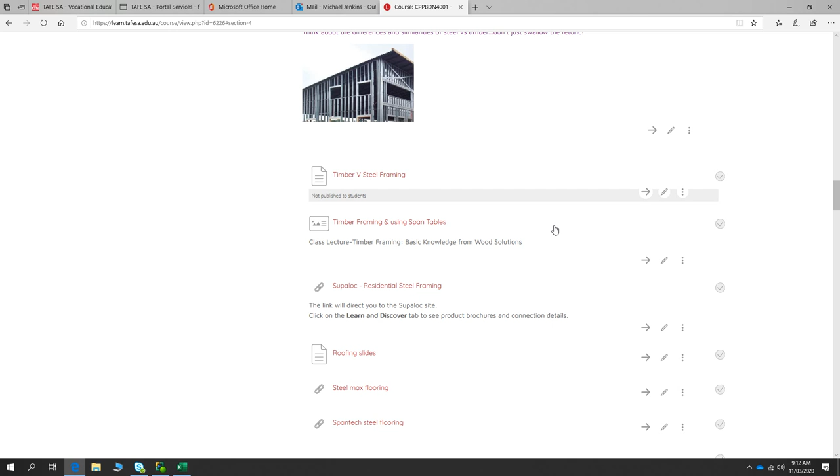So, we've been through timber and steel sufficiently, I think. What we haven't covered yet is termites. I'll see if we can weave a bit of that in toward the end of today's lesson, but the most important thing is to get going with concrete and footings and foundations. So we'll come back to termites a little bit later.

Concrete's one of those building materials that's been around for a long time, and it will continue to be used very broadly.

It's one of the cheapest building materials you can use. Typically it does make up a large part of your building cost, probably around 15-20% of your total build cost. But per volume it's actually quite cheap, around $200 to $300 a cubic metre, depending on where you are in the state and what strength of concrete you're ordering.

The thing with concrete is we typically tend to use it in very large volumes. But it's one of those materials that's been around for a very long time. For anybody who's travelled around Europe extensively, you'd see Roman ruins several thousand years old, still quite solid.

But the majority of use of concrete is in footings, and that's what we're looking at with today's presentation. For our research report, we're comparing suspended lightweight floor framing systems with doing a concrete slab on ground.

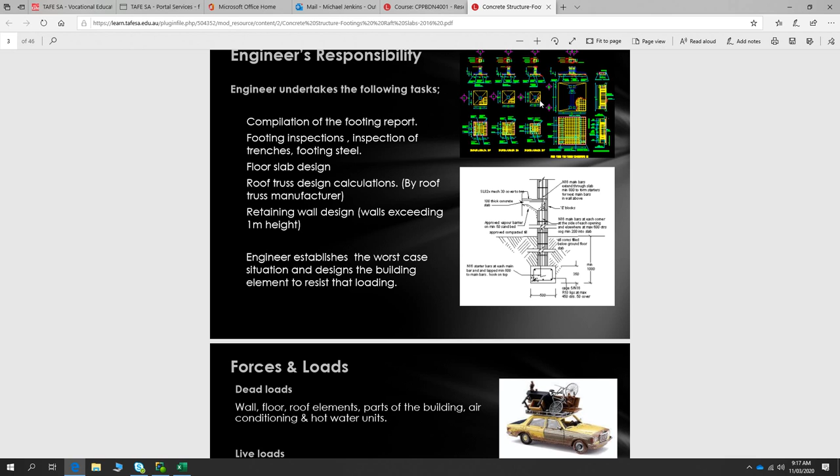Also, it's a very important thing typically to keep any retaining walls at less than a metre high, because if you go over a metre high, it requires engineering for the retaining walls. You're typically looking at a bill of around $1,500 for engineering for retaining walls, plus engineered retaining walls are typically quite expensive to build as well. So if you keep your retaining walls down low, you keep your costs down a lot with your retaining walls.

And typically the way an engineer works is to establish the worst case situation and design the building elements to resist that loading.

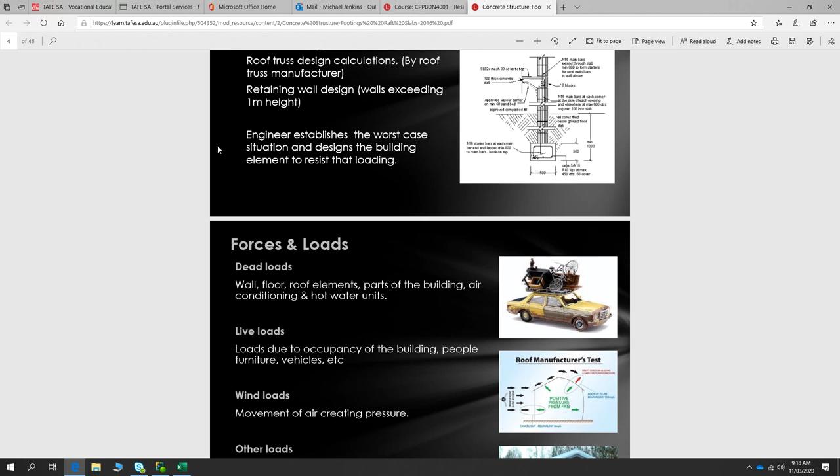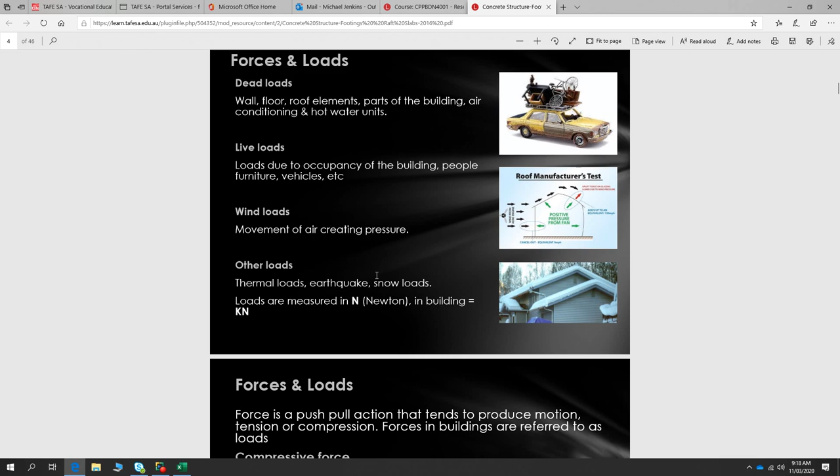There's a whole lot of loads that an engineer has to consider on a building. First, dead loads, which is simply the weight of the building - everything that makes up that building fabric and isn't going to move. That also includes things like hot water services and air conditioners, which impose a fair bit of weight but aren't taken in and out. They also have to design for live loads, considering the weight of people moving into a room, grand pianos, that sort of thing. Then wind loads - the horizontal forces of wind and also the suction created on top of the building as it moves over. And then earthquake or snow loads in certain areas.

We don't have to design for that. In South Australia, no snow and fairly stable conditions.

We covered this to a small extent last week, but we'll talk about it a little bit more. So, force is a push-pull action. Two major ways of looking at the forces impacting predominantly on building elements are compression and tension, and you can see that in buildings everywhere, in just about any element of a building.

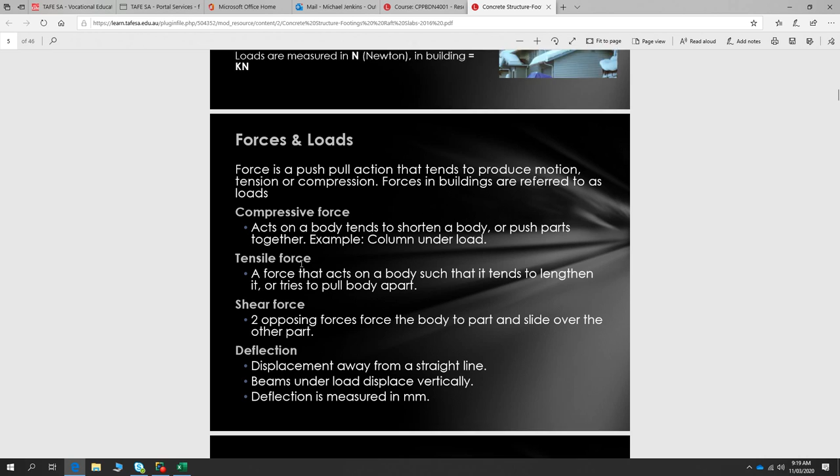Look at that and see what aspects are in compression and what sections are in tension. With that compression and tension, typically if we want to make, say, a joist - something that spans from distance to distance - if we want to get something to span a long distance, the important thing is to make that element deep, because that means the amount of compression and tension resisted is further out, right at the centre here.

Our compression and our tension are neutral right in the centre of the beam. The further we get our material away from that neutral point, and the more material we have at those points, the more compression and tension it resists.

If I get, say, this plank like this, and lay it across two points of support, if I stand on that or jump on it, I might be able to snap it. But if I turn it up this way and retain it at the ends to stop it from rolling, I'll have a really hard time snapping it, because it's deeper in this section than it is through that section.

There are also shear forces happening, which occur where we have two forces acting against each other in very close proximity, with very little eccentricity. If we've got a force happening down and a force happening up, say separated by a metre or so, there's a lot of eccentricity in that - those forces are a long way apart and they'll tend to rotate something. But if the force down and force up are happening very close to each other, then they tend to shear materials.

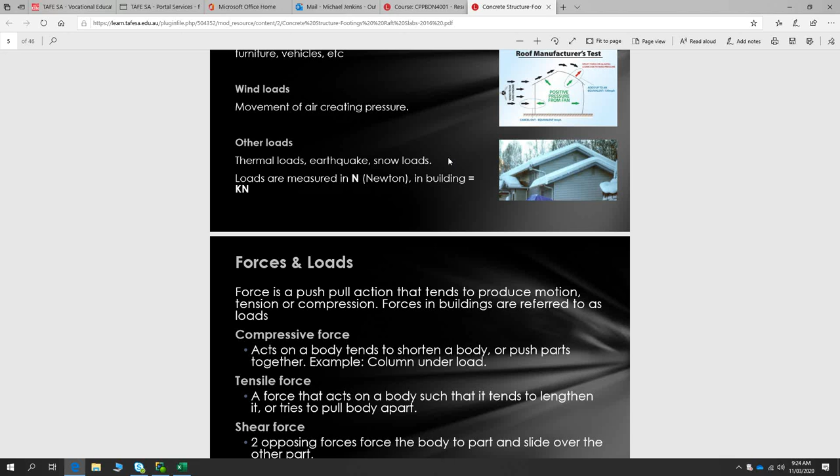No, it's like - foundation might be just the soil, the natural soil that's there, or the compactable rubble or something that we bring in to the site. It's whatever we end up building on top of. So is that what we compact down? Yes. Foundation? No, so we do the footings off that.

I'm sort of hammering this definition a bit, because quite often you watch renovation shows on TV, and that terminology gets mixed up all the time between foundations and footings. They'll say, oh, the foundations are cracking, when it's actually the footings that are cracking because the foundations are moving. So foundation is the rock or soil in its natural state on a building site, or actually, natural or improved state. It's what we end up building on top of.

The footing is the lowest element of the structure in contact with the ground, and it distributes the total load of the building. Typically it's going to be concrete. You can do footings from other things - you can drive steel pylons into the ground, you can drive Permapine posts into the ground - but typically it's going to be your concrete.

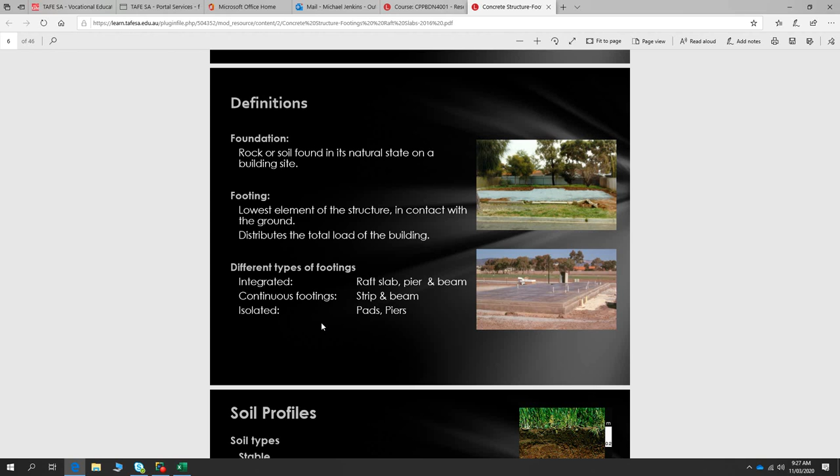So I mentioned before, one of the first steps we do is get soil samples done. Typically your larger engineering firms will have an in-house soil sampling department. So the engineers that I use, they also own a soil sampling business as well, so it's all the one package, and they can rely on those soil samples.

But you don't always have to go with that. You can have independent soil samplers come out and do your assessment. You might even want to get this if you're looking at buying land, or advising people to buy land - you may want to get those soil samples done initially. Typically it costs around the $500 mark to get those soil samples done, which may be a very worthwhile investment because there can be, even for a small house, about $20,000 difference between clay soil or reasonably stable loam. So that $500 can be money well spent in some scenarios.

So the different types of soils we end up looking at: we've got stable soils, which exhibit little movement and provide a very stable base, and reactive soils that react with moisture - they swell as moisture content increases and shrink as it dries out.

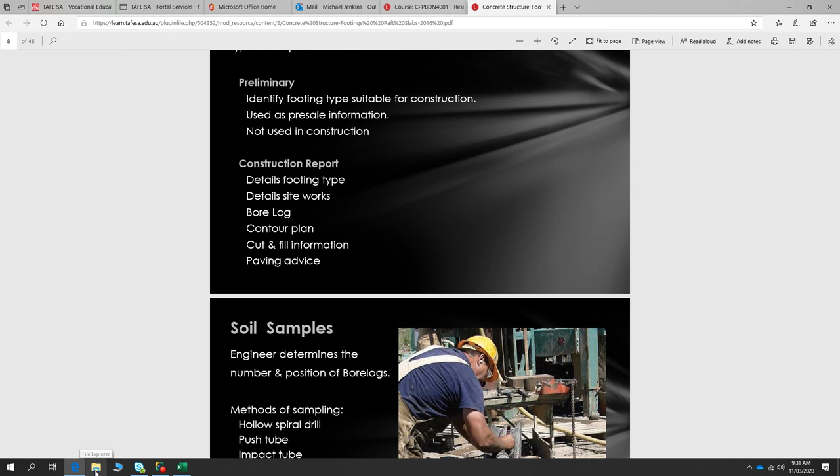Typically it's 3 bore logs. But you may need to get more, or you may be allowed to get away with less. So you're allowed to do less when you're working on a larger subdivision and the bore logs are very uniform across those samples. So when you've got a lot of uniformity across, then you're allowed to reduce it to one bore log, one soil sample per allotment. But typically it's going to be 3 on the allotment.

No, I don't. No, actually, yeah. I was going to see if I've got a complete engineering report for footings that we can just have a really quick look at, because it's an interesting thing to have a look at.

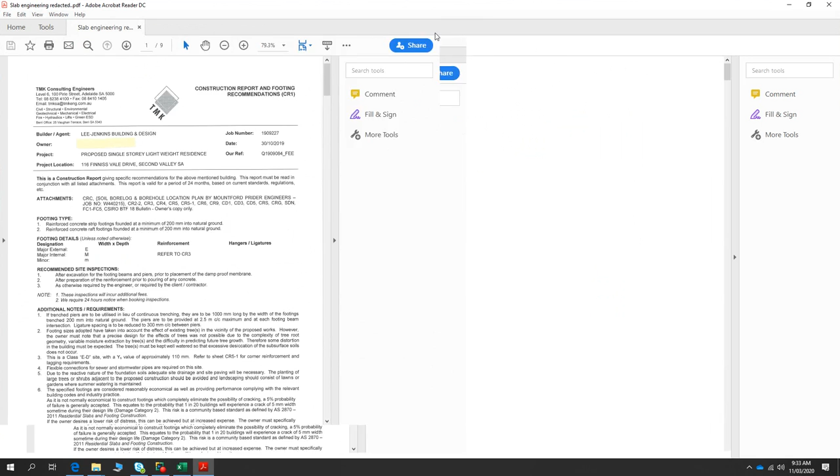So what have we got? Yeah. This is not an entire one.

So what have we got to look at here? So this is a bore log, showing the boreholes and the depth of those boreholes and the depth of the horizons of soil that it goes through. And we've got some bore logs here in the slides, so I won't spend too much time looking at those. That's typically your footing plan that will come through.

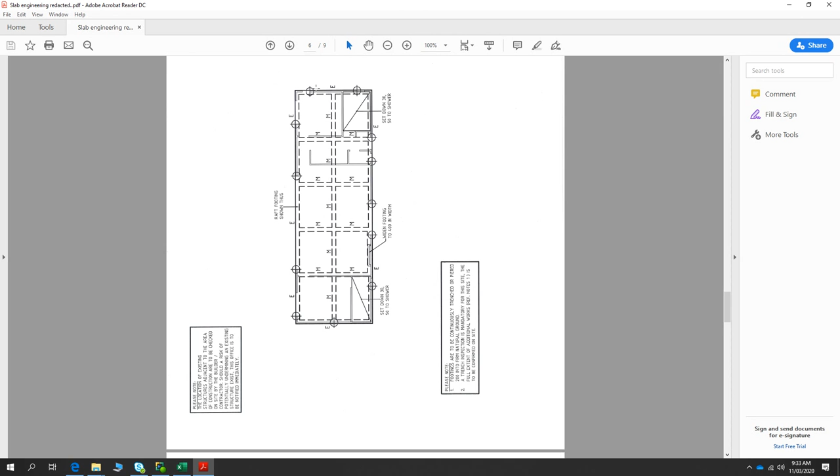I'll rotate. Right. So that details where your footing beams are going to go, and then the slab above that.

And on this page is where the majority of your information comes. So we've got an E next to all these beams. That denotes them as an external beam. And then we have a look on the table here. That external beam is going to be 300 wide by 1150 deep, which is a very deep footing.

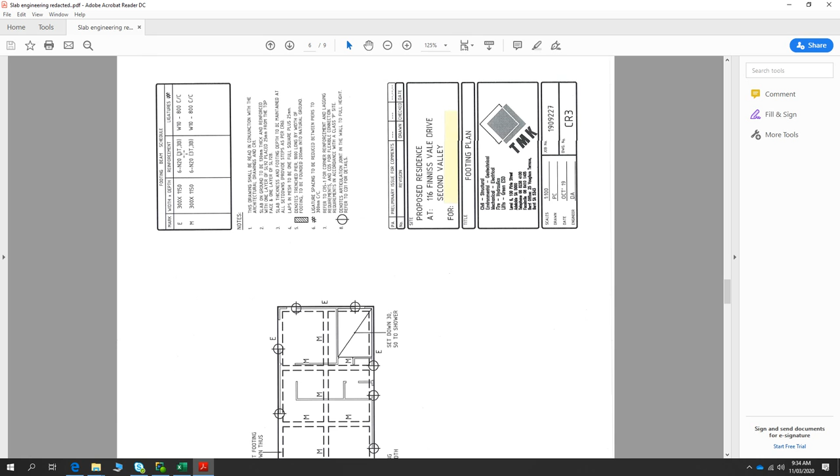And then once we get really deep like that, we have to put a lot of steel in there. So this one's got 6 N20 bars, 3 top and 3 bottom in our beam. And that'll make a bit more sense as we move through. And then this denotes our ligatures, so I'll talk about those reinforcing cages. Typically this page gives you pretty much all the information you need in regards to construction of those footings.

So that's the page that will go to your excavator driver, the people doing the site works and the steel fixing, and also to the concreter. And I've just taken little bits out of an engineering report to summarise it for this, so I don't have the full report here with me.

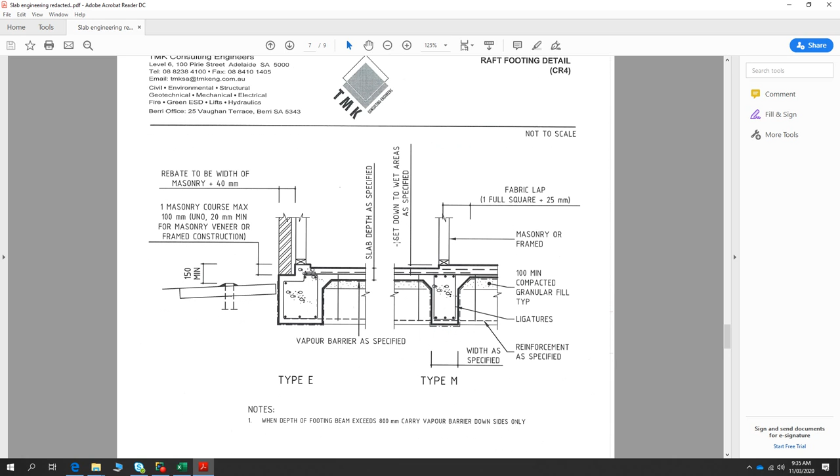But typically, your report's going to be around 30 pages or so, and it's going to include a whole lot of details in regards to how you deal with certain aspects. So you've got some paving advice here and the height of paving and slope of paving away from the building. You've got advice on how you deal with set downs with your reinforcing and your ligatures, where to be placing your internal steelwork, so your slab mesh, and then where to be placing vapor barrier and compacted fill.

It tells us here 100 millimeters minimum compacted granular fill underneath that. So you typically have all of this information within your engineering report. This is detailing to what extent you can excavate next to a footing beam, so to what depth.

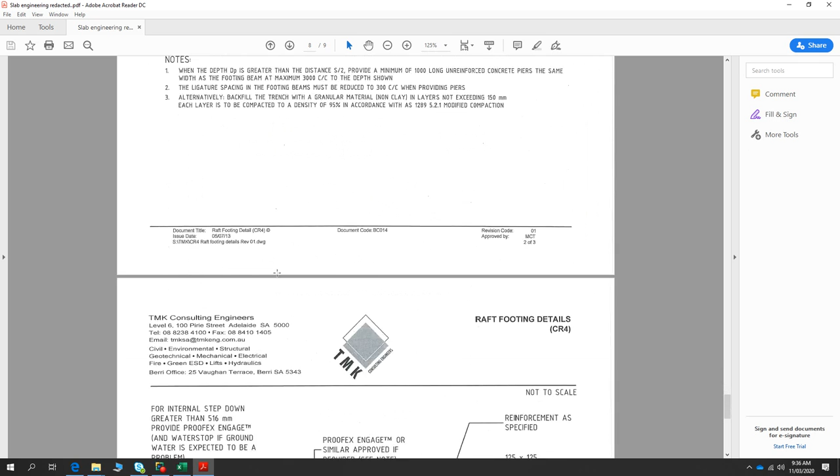That one gives how much lap you have to have of your slab mesh within any set downs. That's an important detail for determining how much slab mesh you need, and also what you have to do with the excavation. When you're excavating on site, you have to cut this soil away deeper.

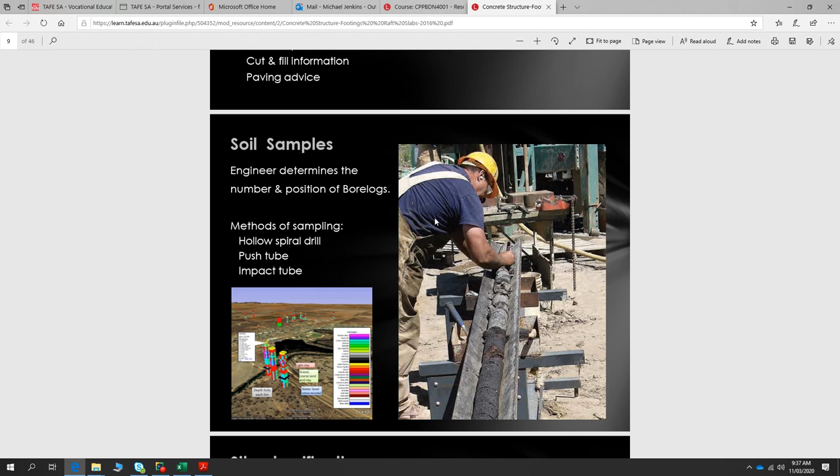So that's some little snippets out of an engineering report. The reason engineers include things like paving advice around your footings is because that impacts the amount of moisture gathering around your footings. If we've got soils that swell or contract with a lot of moisture, we want to reduce the amount of moisture or rain that soaks into the ground near our footings. So we need 50 millimetres of fall for the first metre of paving to ensure the water moves away from the site.

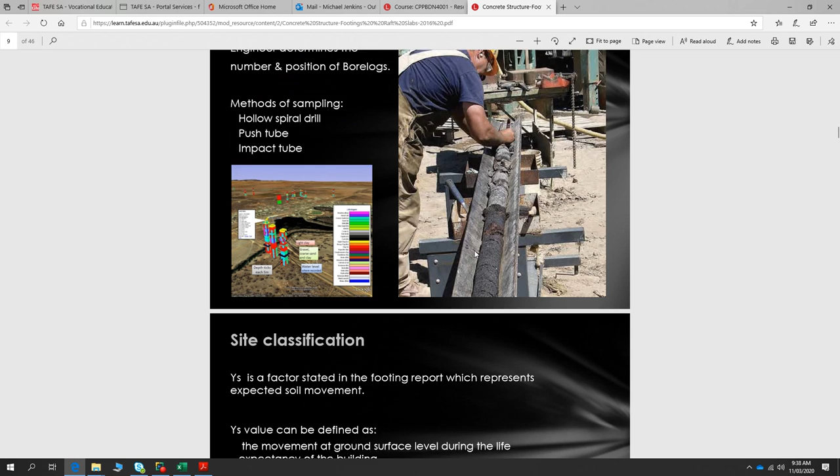The main thing we get from our soil samples is the classification of the site, and we get our Y value. Do I still have that? I think on this engineering report, right at the start, we had a Y value of approximately — this class ED site with Y values approximately 110 millimetres.

Now that's really quite extreme. That's why those footing beams are 1150 deep, because we can expect 110 millimetres absolute maximum movement between when the soil is completely dry and when it swells with moisture. So 110 millimetres, that's a bit taller than this marker pen — that's probably about 90 mil. So yeah, 110 millimetres of movement. That's how much that building could potentially move on the site, up and down.

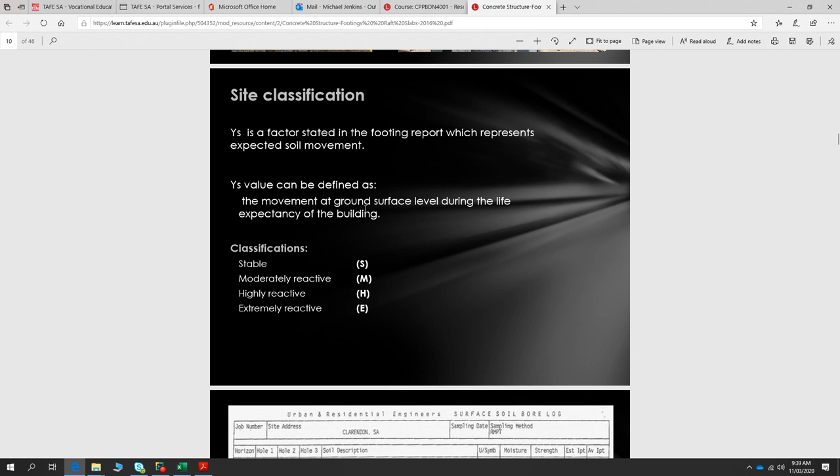That Y value is defined as the movement at ground surface level during the life expectancy of the building. So our extremely reactive classification is when you've got Y values over 100. Highly reactive is Y values over 70. Moderately reactive is between 20 and 70, and stable is below that.

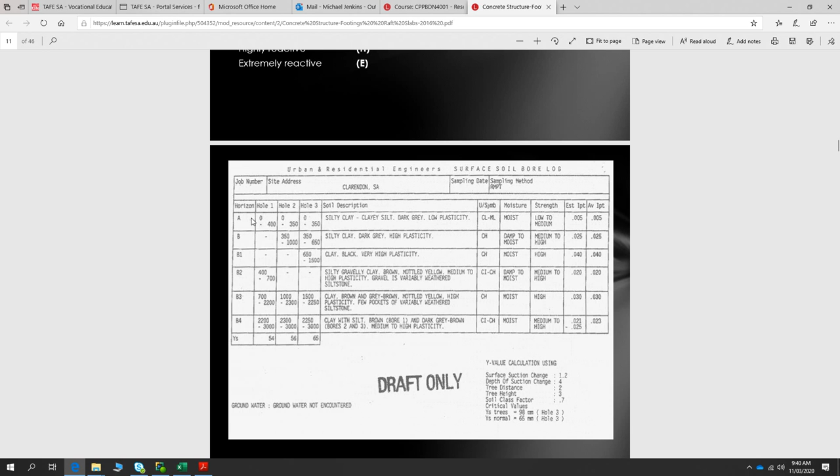I showed you that bore log quickly earlier on, tilted on its side — this one's a bit friendlier to read. What we can see in this bore log is that we've got 3 boreholes which were done: borehole 1, borehole 2, borehole 3, and that should always be read in conjunction with a site plan. That site plan shows where borehole 1, 2, and 3 were located, because that helps us build up the picture.

So we've got 3 boreholes done there, and we can see the total depth of those 3 boreholes by looking right down at the base of the table — they are all 3 metres deep. So they went straight to 3 metres. A borehole will not always go entirely to 3 metres, and sometimes engineers will specify deeper boreholes.

In our office, I think we typically went to 4 metre boreholes, because what we have in South Australia are called deep-seated clays, meaning we've got clay to quite a depth, and you can get small amounts of movement even at 4 metres deep, because you've got moisture percolating through to that depth. So in certain situations you can have impacts on the top of your soil happening from about 4 metres down. The minimum you have to go to is 3 metres, but sometimes engineers want those taken to 4 metres or so. At other times you hit rock, and when you hit rock, you can't go any further with a push tube. So that's the end of it, and that's what's called refusal.

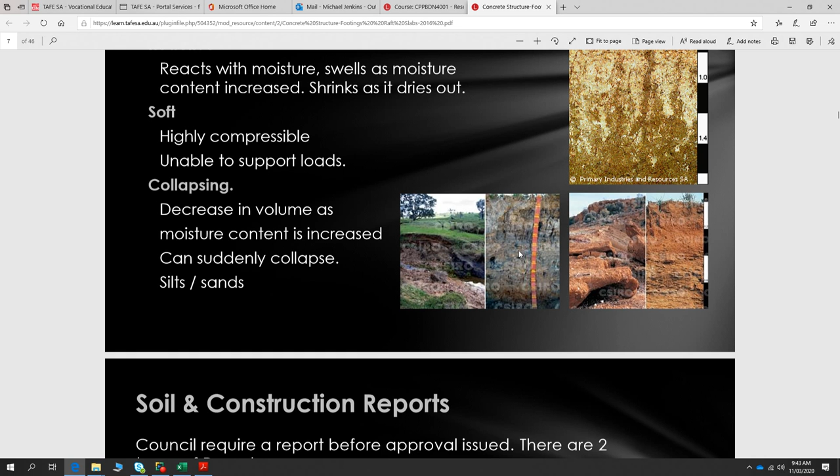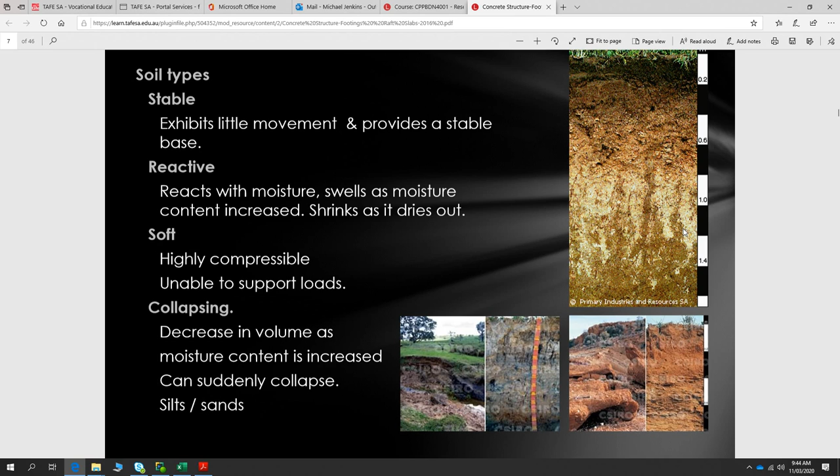In this soil here, we can see we've got the humus layer right at the top. For the first 250 mil or so we've got humus, then a loam - a fairly nice, friable loam with a bit of weathered rock in there. Underneath that, it looks to be a white clay with weathered rock fragments going into a brown clay underneath that. So we've got our different horizons here - one up here, another there, another about there, another approximately there - and that's what gets reflected in our bore logs.

So we can see those different horizons of soil, and it's determined by the soil sampler or the engineer inspecting how much movement we can expect from drying to saturation of that soil. Sandy soils won't move very much at all with drying to saturation, whereas clay soils will move a lot, and it's that percentage of clay within the soil that will determine how much movement.

The other important thing to note from our soil samples is not only expected movement at surface level, but how much strength that soil has as well. Some soils don't have a lot of bearing capacity - I can't remember what the cutoff is.

In AS2870, the Australian standard for residential slab footings, I think it's about 110 kPa or so bearing capacity your soil has to have - that's a moderately loamy, clayey sort of soil. Some soils won't have that bearing capacity and need to be improved by bringing in compactable rubble, etc. But that's the other aspect your engineer is going to be looking at - the bearing capacity of the soil, how much weight it can take before pushing out of the way.

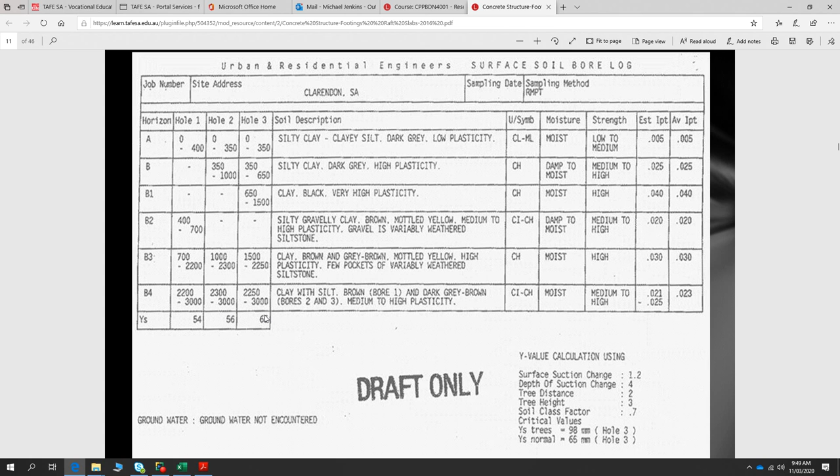It also depends on what sort of weight is going on there, but there's a lot of uniformity in those Y values. If I had a Y value of 54, 56, and then 20, that would probably be just as, if not more, concerning, because then we can see there's the potential for a lot of movement in one area but little potential for movement in another area, if that Y value is extremely low. So it's not just the total number you're looking at, but also the difference between the two.

So that raft slab helps carry the building no matter what the soil is doing.

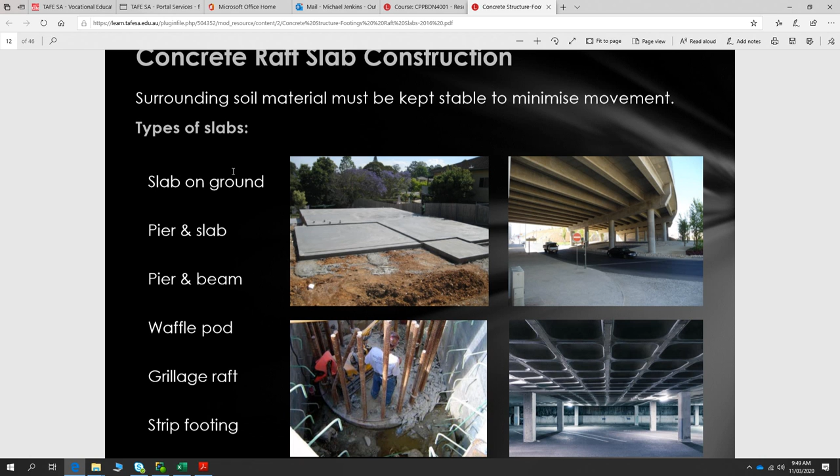Beyond that, if we've got quite problematic soil, like in places around toward Port Adelaide, from Bowden, Brompton area through to Port Adelaide, there were clay pits dug out for manufacturing bricks. Those pits have been filled in with all sorts of stuff—car bodies, whatever. Those are particularly problematic sites to build on, because all the stuff chucked in there gets compressible over time. So if you're going to do a footing on top of that, you want to bypass all of that junk and get into solid ground underneath.

One way of getting into solid ground underneath is to auger piers. You get a large auger. Did anybody see any of the work going on around here? I don't think there's any augers happening around here, but when all this Southern Expressway bypass stuff was being built, there were really big machines called continuous flight auger, a CFA, maybe 20 metres high or so, augering piers down into the ground.

Anyhow, that's typically what you do. You have a really long auger that takes out a tube of soil, and then you make up a reinforcing cage that goes down in there, and that gets filled with concrete to make a concrete pier going all the way down to lock into stable soil underneath. So that's how you bypass all the junk deposited on top. It's like a big drill—a giant drill for the earth.

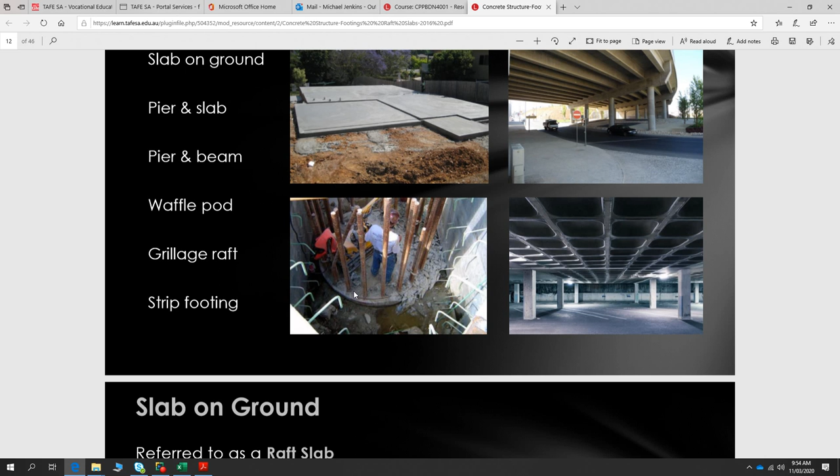With your typical raft slab, to do a cross section through that, as we saw on that engineering report - I'll scroll down to detail - we see that the reinforcing is placed inside those footing beams with 3 bars on the top, 3 bars on the bottom, and ligatures that hold them into a cage.

I don't have a cross-section through a grillage raft here, but a grillage raft instead will have - these are 20 mil bars for this project, but a grillage raft might have 32 mil bars, so really fat bars, but only have 1 at the top and 1 at the bottom. So it makes it so much simpler for placing that steel and fixing it, because you just have 1 bar and then a hanger from that, and then you have your other bar dropped in the bottom of that. So the steel fixing for a grillage raft is really quick and simple.

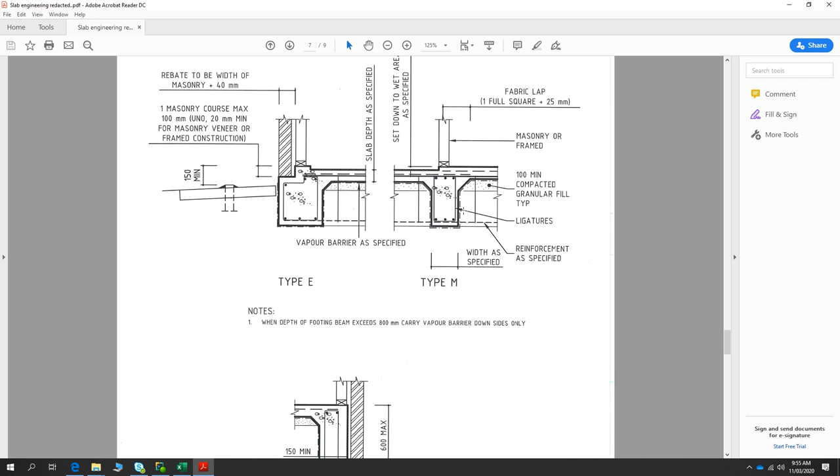And so a lot of your volume builders prefer to use that system. The downfall of using a grillage raft is that you don't get quite as much even distribution of forces through your footing. So you probably don't want to do that if you're going to have an exposed concrete surface, or if you're doing a polished concrete surface, because there's more likelihood of cracking happening in your slab.

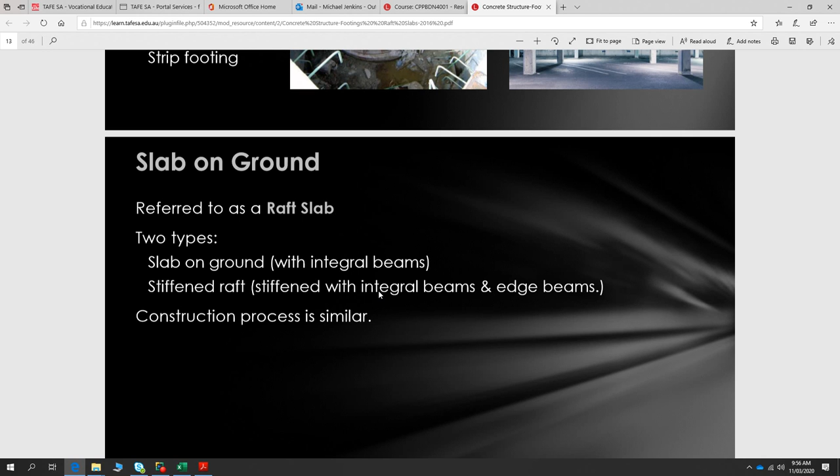So a bit of cracking is not always an issue. The Australian standard for slabs and footings allows 5mm cracks, which I think is really quite extreme. But there is some allowance for cracking in concrete, and cracking is almost unavoidable. But there are some things you can do to minimise that, and one of those ways is the traditional raft slab as opposed to the grillage raft.

Beyond the grillage raft, there's also strip footings. If anybody's lived in an old cottage in the eastern areas of Adelaide, sort of the Unley Parkside region, you'll notice there's a lot of cracking that happens in those buildings. It's not because the soil there is bad, it's not as bad as it is in Keswick or Newton or Rostrevor. The reason those buildings crack a lot is because they were built before the invention of the raft slab, and they typically had strip footings underneath, which aren't strong enough to resist the forces in our soil around Adelaide.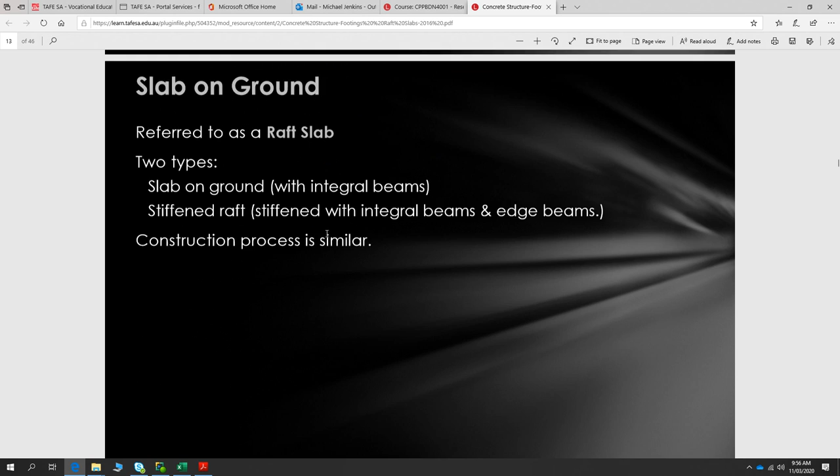So I'll go through the construction process for our raft slab, and then progress through the others fairly quickly. For the stiffened raft, the first thing you do is clear the site. Typically you're going to be removing 150 millimeters of topsoil, but you never really know what you've got under the ground until you start digging it away.

At the place where we're building at the moment, I thought the topsoil typically was going to be around 300 mil, and we'd be removing 300 mil. In places, we removed up to about 800 mil before we stopped getting black humusy soil out, and it was in dips etc. So I guess that was a fairly good case scenario, because there was lots of fantastic topsoil and very little rubbish soil to get rid of. But you never really know until you start excavating.

Typically it's only going to be around that 150 millimeter layer that has humus in it. So humus, that's all your broken down grass and leaves, all the organic matter. The reason you want to remove that is because it's quite compressible. If you leave that on the ground and put a building on top of it, it squashes down and can't bear load.

You want to take that away and put it up the back of the block, or wherever you're going to be doing garden beds, because it's fantastic stuff for growing and takes thousands of years to produce.

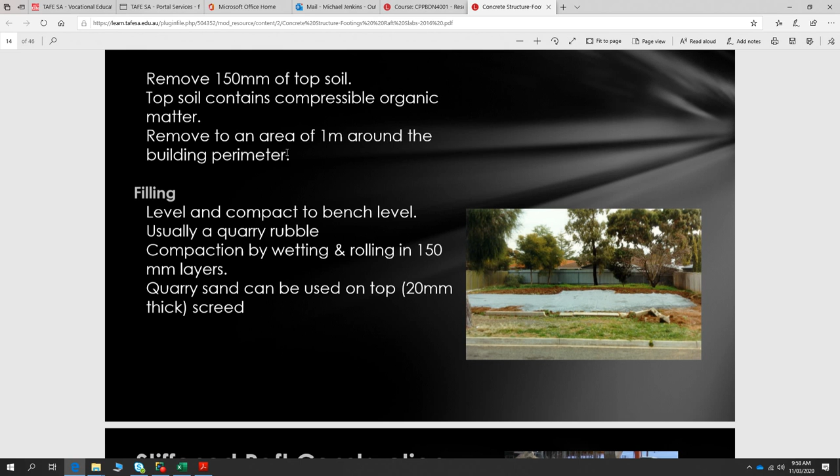So you take away that top layer of soil, and you do that to a metre around where you're going to be working. Typically, you want to give yourself about a metre of flat section around your slab, because you're going to be doing paving, etc. It's so much easier to excavate and cut things flat when you've got a vacant site than when you've got a slab in the way.

Then you'll typically bring in about 100 millimetres depth of compactable fill and create that building pad to a metre past where your footing beams' edge is going to be. Then you compact it and roll it in, in maximum 150 mil layers. So if there are areas where you have to build it up a lot more, you lay it in maximum 150, wet it, and compact it.

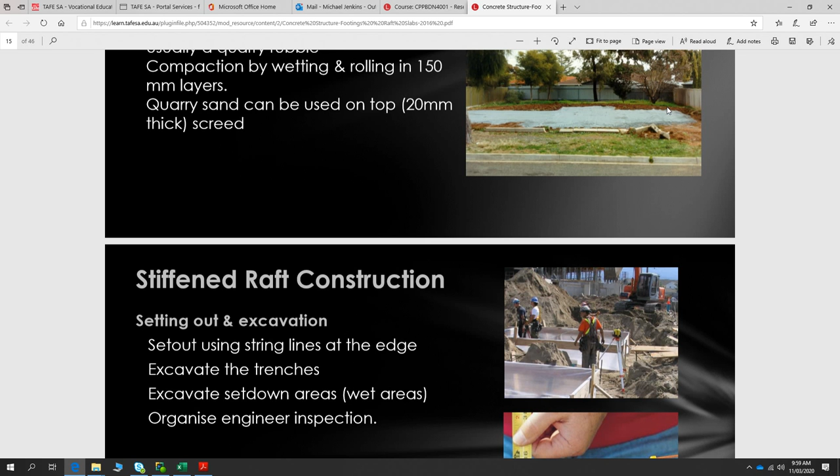Once you've got that flat site - and that's a fairly messy looking one, I'd probably like it to be a bit smoother than that before you start marking out - once it's all screeded off, really nice and flat... bear in mind, the flatter and smoother you get it, the less concrete you use. When you're going to have a concrete bill of around $20,000 or so, 10% extra can be a fair bit of money. So it's worth the time getting your bench really nice and flat.

So that's an extremely good example. You typically won't get footing beams cut in that nicely, but that shows the 100 millimetres of compactable rubble on top, or quarry sand, and then a 45 degree cutaway for the edge as well. That helps give the interaction between your footing beams and your slab extra strength right in that corner.

Breakaways like this are pretty much always going to happen, so that's a really good example. You'll very rarely see footing excavation as neat as that - that's typically more what you want to see. Well, that's on the rough side of things, I think.

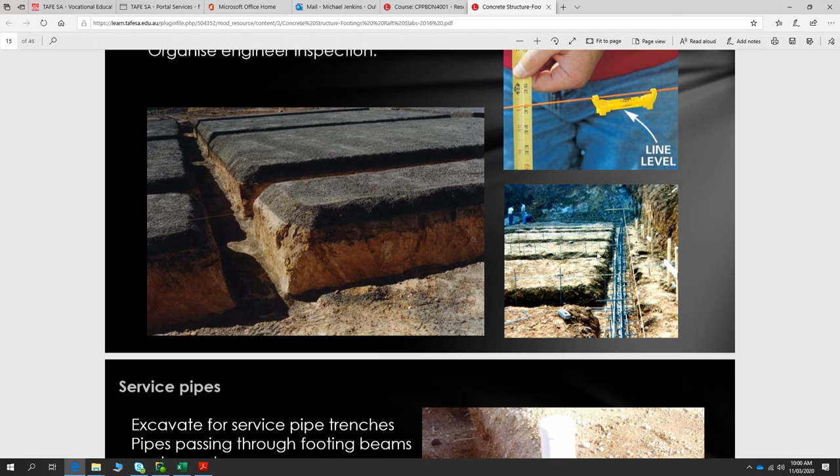Anyhow, so you've benched your site, and then you set out string lines. I think I mentioned last week the 3-4-5 triangle. Does everybody remember the 3-4-5 triangle? Yeah, so that's how you do it.

So you work out definitively where one side of the building is going to go. You measure that off the boundary from your site plan, get that one string line in place, and then set out all your other string lines from that using the 3-4-5 triangle. Then do the check method corner to corner, and if they all match up, that's it. So once again, it's incredibly important to spend time on that process, or have your builders and concreters spend time on it, to get it perfect.

Yes, so concrete will end up going on top of this. So basically that soil or that foundation ends up being the formwork for the concrete to go over top of. If, for example, we didn't cut in footing beams like this and just did a flat slab, that slab wouldn't have the strength to resist forces picking it up from side to side.

As I expressed before, the greater the depth we give something, the more strength we give it. So if we have a slab and we excavate for beams like that and then fill those full of concrete, that gives our slab a great deal more strength to resist forces of heave and subsidence.

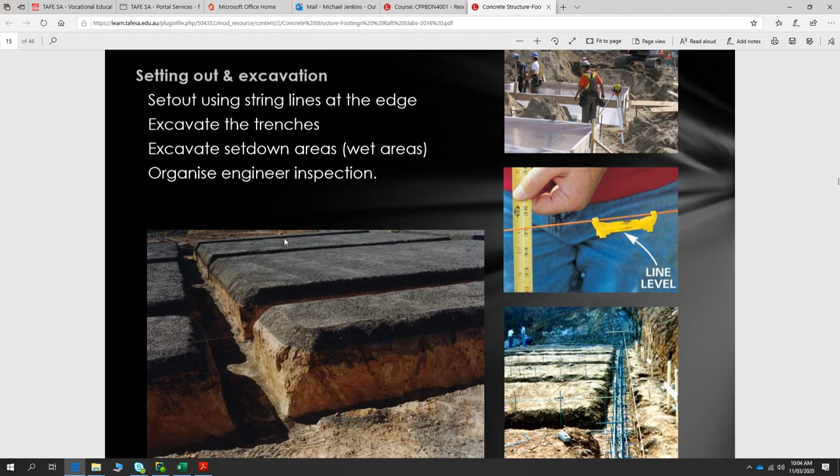Once that excavation is going well, before it's finished, you'll probably get onto your engineer and email the inspections department to book in an inspection for tomorrow morning or evening. Then the engineer will come out and inspect at this stage, measuring the depth and width of trenches, telling you to clean them out, etc., and then give their report and the go ahead for fixing the steel.

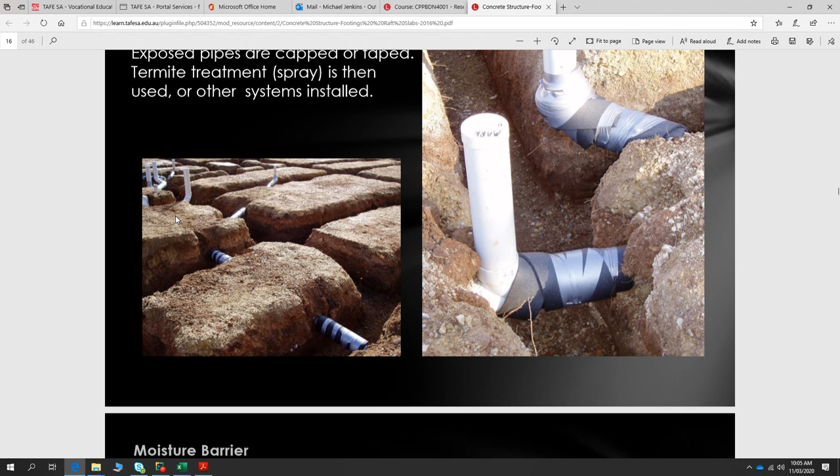Whilst you're waiting for your engineer to arrive, you get your first fix plumbing in. So before putting any of the steel work in, you want to put all your pipes in and then backfill over where those pipes are. That's a fairly rough job there. I think that would have been fairly clayish soil because you've got your beams really close together - would have been a very difficult one to excavate for, and with all that footing and plumbing in there, fairly difficult one to do.

Anyhow, what you'll notice on this first fix plumbing is that there's this spongy rubber taped around all of those pipes. Wherever you have pipes which go through a footing beam, you need to put a layer of that lagging around it. If it's moderately reactive soil, you do one layer of lagging. If it's highly reactive or extremely reactive, you do two layers of lagging around it.

That's basically the shock absorber for when soil moves, different to footings. Because if we've got soil that's getting saturated and it's expanding, typically that's going to push past the footing beams. It'll try to lift the footings up a little bit, but because there's a lot of weight, it'll push past them and try to lift the plumbing up as it goes. Therefore, if we do lagging around the pipes, that allows some movement in there because we don't have concrete around the pipe. But it's things like this that are very important to look out for.

So what's happened here is the plumber has lagged all of that, and that's all been lagged correctly. But as soon as you go putting concrete in here, concrete is going to bind around that pipe there, that section there, and that's not lagged. So what I'd like to see is that lagging carried around that and packed out, or possibly you get a piece of ply in there and pack soil again, to make sure you don't get concrete binding around your pipes. Because as soon as you get concrete binding around your pipes, the rest of that lagging is pretty much useless.

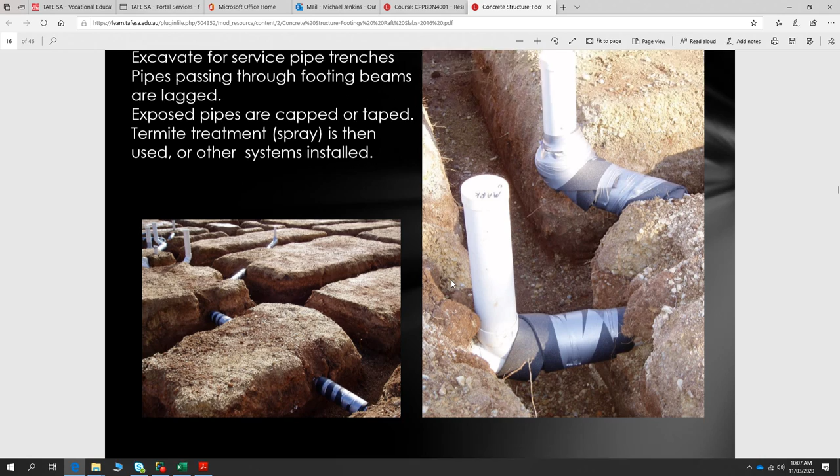So yeah, just those small details can be very important. If that's on the inside of your slab, typically that's going to be less problematic than if it's on the outside of your slab, because you get more differential movement on the outside. But because I've got pipes coming out here, I imagine that this may be the external one. Anyhow, it's those details to look out for.

Following that, for all residential slabs you have to have plastic underneath to stop moisture ingress through the slab. So that 0.2 mil polythene layer gets put down, and that's a fairly important bit to get right as well. You want that done very neatly, and you want adequate plastic in those trenches, of course. So plastic goes down, and then the steel fixing happens for all of your beams in between.

So what we can see there is we've got 3 bars at the top, and then we'll have 3 bars at the bottom of that beam as well. Those ones are probably like 18 mil bars or so. What you want to see is all of those bars lapping correctly. You want them coming right to the corner. If you don't have bars which come all the way to the corner, then that's a very vulnerable position for that to crack and open up when stresses are placed on that. So those bars end up being held together in big cages made up by these ligatures.

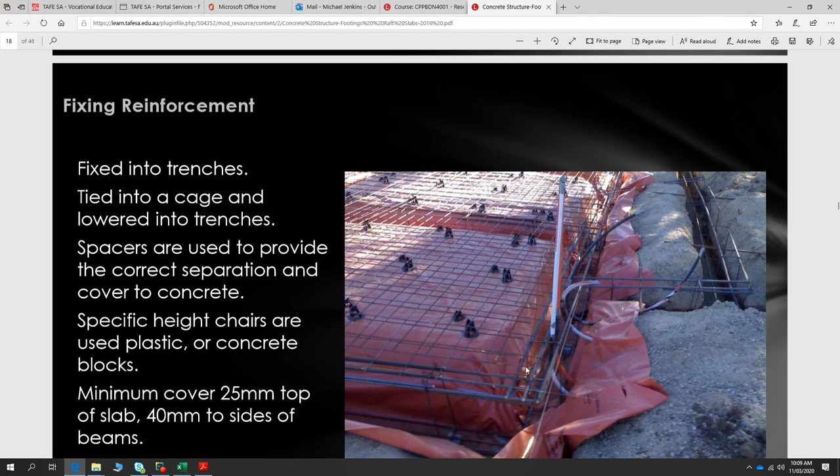So typically the way it happens is those large cages are made up next to the slab and then carried in and dropped in. When you've got plumbing penetrating through, you have to lay the bars down underneath, tie your ligatures, have them sitting up and tie it up high, then tie your bars in there and drop them down. After that's all in place, you put out all the slab mesh.

So these bars here resist a lot of your forces of heave and subsidence, whereas this slab mesh helps control cracking in your slab surface.

If you've got some soft fill underneath, or more than 300 millimeters of uncontrolled fill, then you need to do 2 layers of mesh. So 1 layer of SL72, 1 layer of SL92.

With your mesh, that's just for square mesh, and SL72 is 7 mil bars at 200 centers. Can anybody think what SL92 would be? SL82 is 8 mil bars at 200 centers. Oh, 9 mil bars at 200 centers. So there's actually a fair bit of steel that goes into SL92, and then also you've got mesh, which is 10 mil bars at 100 mil centers, so if you're doing a wind farm or something like that.

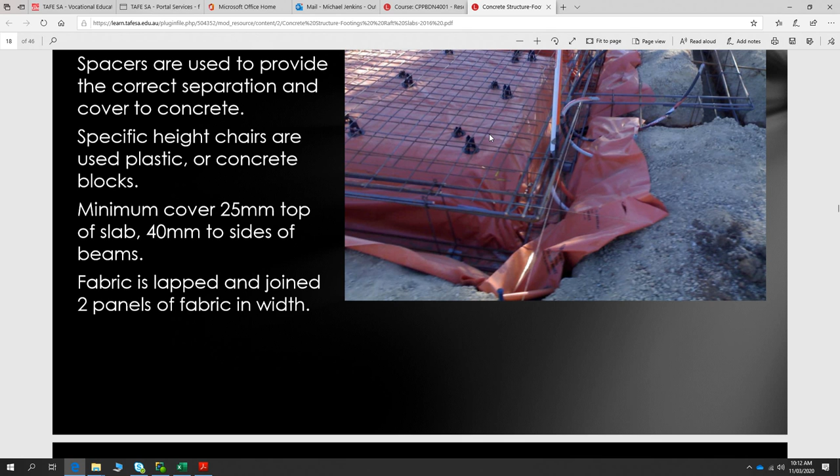I don't know what went wrong with the construction of this. Some bits in here, but that's important to minimise, because if you don't have adequate concrete coverage, that steel will rust, and as it rusts, it expands and pushes concrete away from the steel work, which means it rusts even more, which means it expands more and pops concrete away. So 25 millimeters to the inside of buildings, to any protected surface, and then 40 millimeters to the sides and bottoms of your beams.

At this point in time, you also have to think about termite protection as well. So while you're waiting for your engineer to come out and inspect the steelwork, you can get like Termimesh, or cordon, in to install small sections around all of your pipes. Your concrete slab is considered to be an effective deterrent against termites because they can't get through that slab. But because concrete shrinks as it's going off, it shrinks away from pipes and leaves a gap next to those pipes, so you get - this is an example of Termimesh.

Termimesh are an Adelaide company. They'll come and put a stainless steel skirt around all of your plumbing penetrations, so that when that concrete shrinks away from that, it doesn't leave a gap that termites can come in through.

So cordon do basically the same thing. Cordon barrier looks a lot like your orange plastic, but what it is, it's orange plastic with termite poison, like a layer of termite poison, then another layer of orange plastic again. So it's this termite poison sandwich, and that gets put around your pipes as well, so that once again, when termites try to eat their way through it, they get poisoned. So that's a chemical-free way, and cordon uses chemicals.

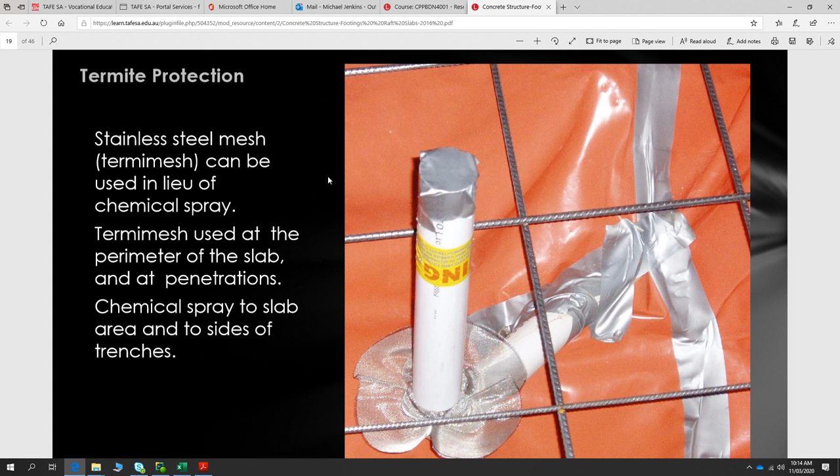Another way is you can spray down the site prior to laying a slab. In terms of the NCC and termites, it allows for no termite protection if the primary building elements cannot be eaten by the termites, if they're not a food source for the termites. So that might be that all your structural elements are made up of termite protected timber, your blue or green timber, or it might be that it's steel frame.

So that's the example of, well, that's once again the NCC - how it's the worst possible building that can legally be built. You can get away with not doing termite protection in those instances, but still you're going to have timber architraves and grand pianos and all that sort of stuff that termites will want to eat. So although you can do that, I still suggest, it's typically less than $200 to get all your penetrations sealed up, even if the NCC doesn't say that you have to, because your primary building elements are steel also.

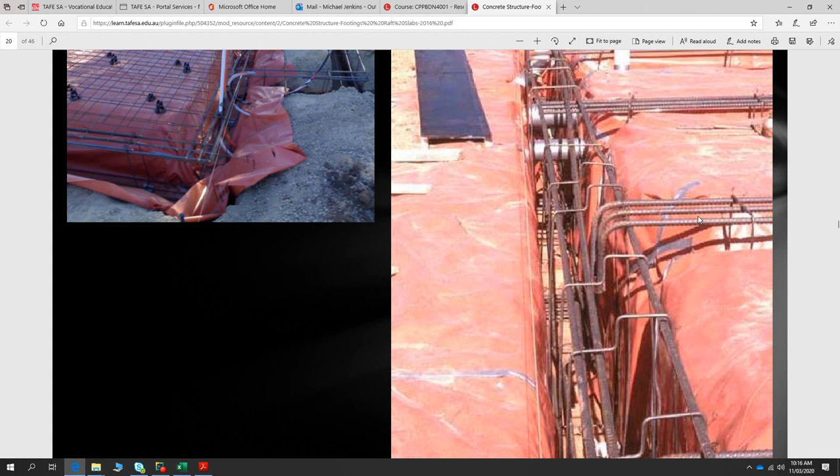Here's more instances of steel work. These are fairly solid bars, 20 mil bars or so. That's some pretty intense reinforcing there. We've got ligatures that are stepped, that's for a rebate. So stepped ligatures for a rebate happening there.

That's a fairly typical completed one. So that's that cordon barrier that I was talking about.

Also, a very important thing is cap all your pipes with tape as well. You don't want to get any concrete in those. Another handy thing is some plumbers will use plugs on the end of those pipes. They'll put the pipes in, and those pipes won't be carried anywhere just yet. They'll plug the end of those pipes and fill them up with water. That way they know that when the steel fixing happens, because the steel fixers can be quite rough with plumbing, if they're too rough you'll get water pouring out at that point, telling you the pipes have been broken, and you can repair all that before any concrete goes in there.

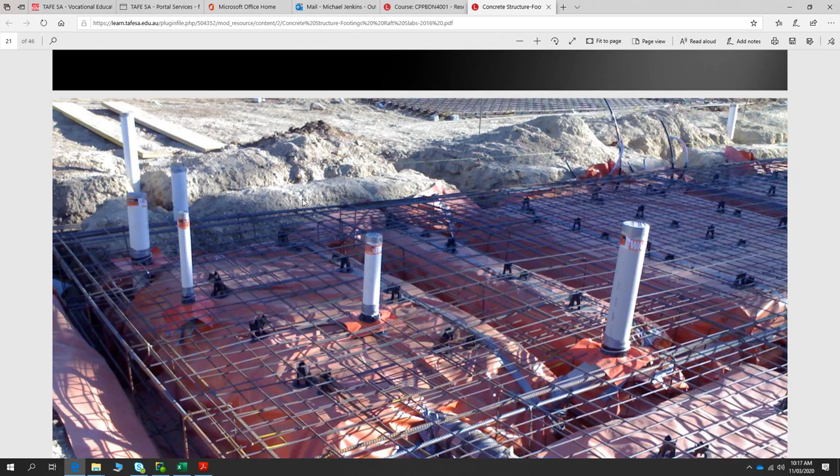So after all that steelwork's in place, the engineers come out, inspected it, and said yes, it's all fine, everything's working fine, you've got adequate coverage, etc. Then the concreters will come in and do the concreting.

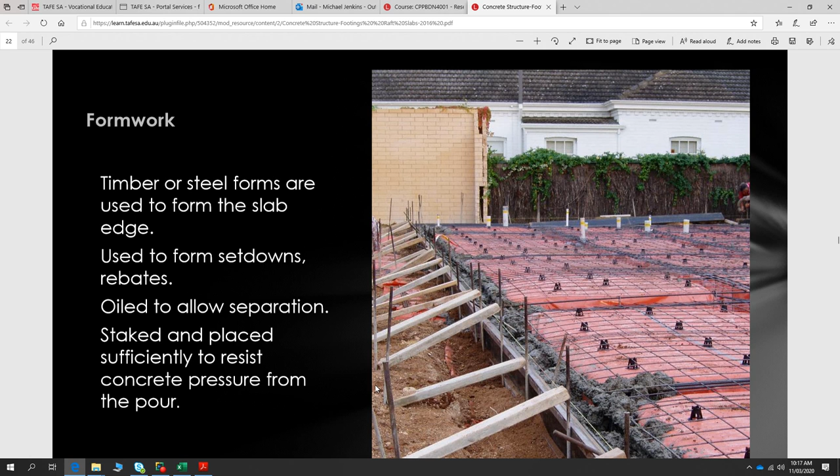You might use timber or steel forms. That's up to the concreters, and they may form it up beforehand, or they may form it up while they're pouring it as well. So typically with a lot of slabs, concreters will actually have their pins and things in place, but then they'll actually be forming that up as they go along.

If you're using timber forms, they're oiled to allow for separation, so they don't go sticking to the concrete afterwards. Very important is that they're placed and staked adequately to ensure there's no overturning while the concrete is being placed. The concrete pours are pretty hectic and very busy. You don't want any problems with that.

Before you go placing the concrete, you have to give council at least 1 day's notice, so they can come out and do an inspection as well. They may or may not come out to inspect.

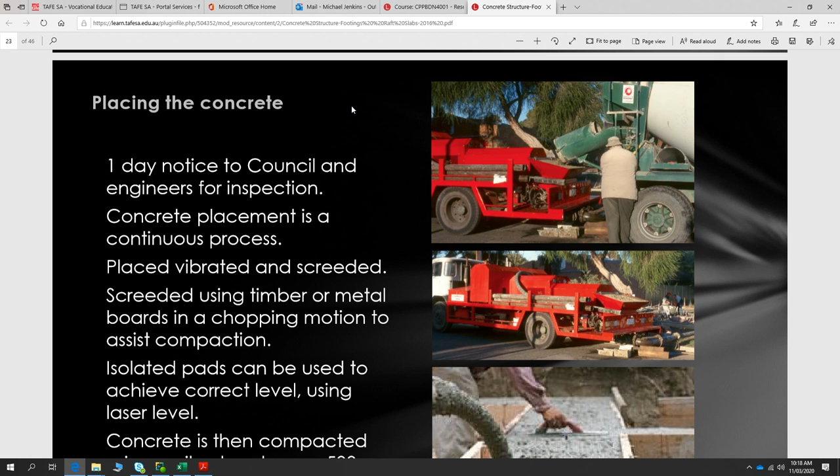On the day of the pour, it happens as a continual process, and that's up to the concreters to organise. A better concreter will have trucks arriving at just the right time and ordering just the right amount of concrete, because what you want is all of your concrete arriving back to back, so you don't have sections going dry and having cold joints and things like that in your concrete.

They'll pour the wet areas first. So typically you use, this is a concrete pump here with a hopper on the back, and this one's a line pump. You've got a line coming off the back of that, and that gets moved around and the concrete gets placed with that.

Line pumps are typically much cheaper to hire, but a lot more work. Whereas a boom pump - do I have a boom pump picture? No, I don't have a boom pump picture. Has anybody seen big concrete pumps with a really big arm coming off of it and a hose hanging from it? Yeah, so that's a boom pump. A little bit more expensive, but much easier for placing the concrete, because that boom can be operated by the concrete pumper who's out on the slab and just move that around.

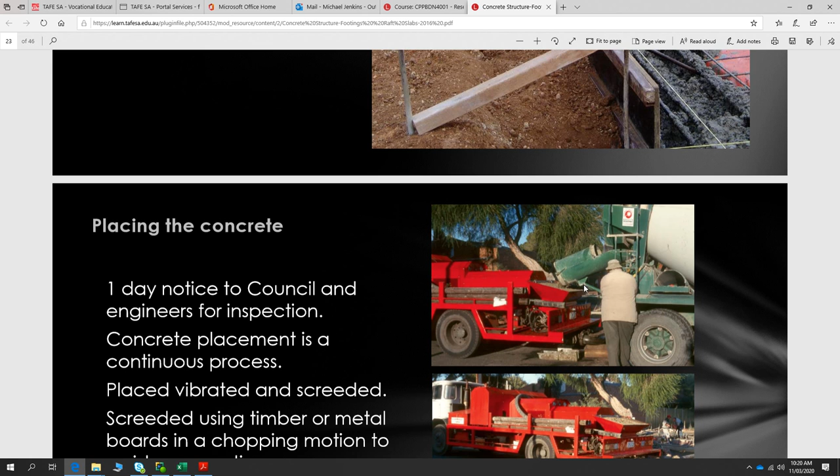Anyhow, typically that's the mainstay of placing concrete now. People rarely use wheelbarrows for moving concrete around. You typically have a concrete pump come out. A concrete pump's going to cost close to $2,000, but it's going to make that process really quick and continuous.

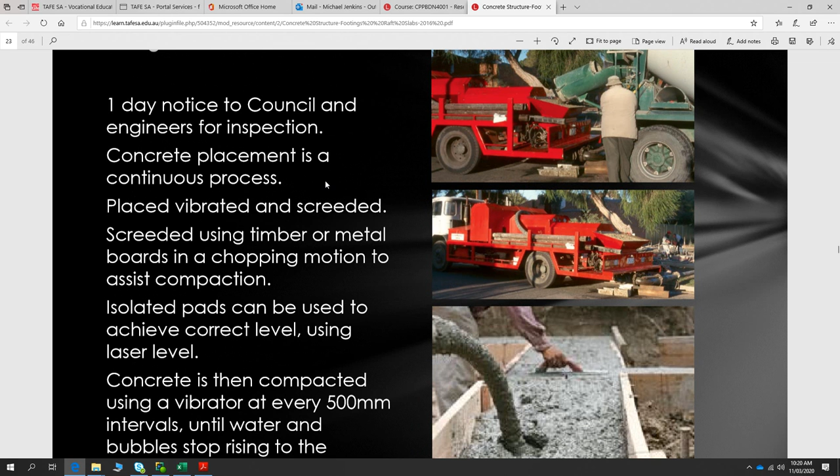Your pump operators are incredibly important people in that concreting process as well. They'll be doing a lot of the work of placing the concrete and compacting it, vibrating it into position. So that concrete goes in, and you want that to happen as a very continuous process. You don't want any breaks in that, and that comes down to the timing of all your trucks. Once the wet areas are done, once the beams are done and your wet areas, then you start doing the top.

The process of doing the top is, when that concrete's going in - this is the concrete coming out of the line pump, it gets vibrated into place. You typically have one or two of the concreters going around with a two-stroke motor and a plunge vibrator that goes down into the concrete and brings up all the air bubbles. They want to avoid hitting any of the steel work with it, because when you hit the steel work it moves all the aggregate away out of the concrete. So you just want to be plunging that in until your air bubbles stop coming up to the surface, and keep moving that around.

Then once all the beams are poured like that, the slab goes on top.

Then once the slab's placed, your concreter will want to know what sort of surface is going onto that concrete, what the purpose of that is, and they'll want to know that probably prior to even quoting on the job. If it's going to be a tiled surface, you want it reasonably smooth, but still have a bit of roughness to enable a little bit of grab for your screed that goes on top. You don't want lumps and chunks sticking up because that's going to compromise your waterproofing. You don't want it to be steel troweled smooth either.

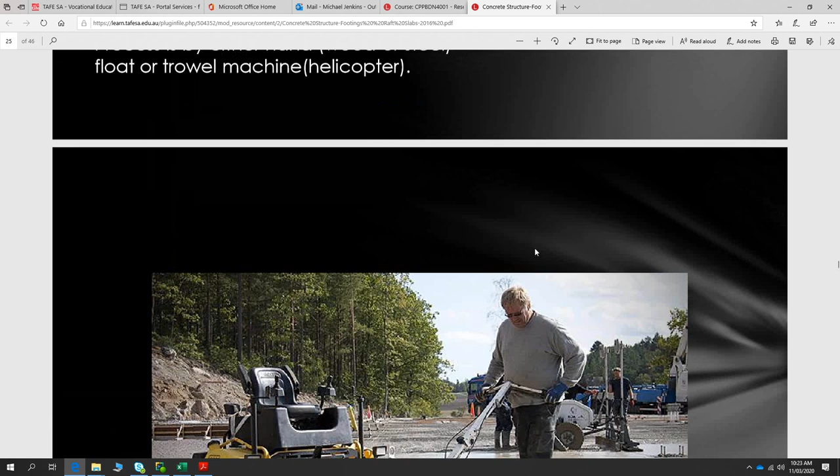Also, if you're going to do polished concrete, you want the top of that concrete actually a little bit rough. The reason is because the diamond bits for cutting back the concrete actually grab on and do the cutting better if it's slightly rough. If you do a steel trowel finish, it's going to be really hard to cut it back.

So the process of getting that surface on there: once the concrete is placed, it's bull floated. You'll run a large screed, like a large flat bar across the top, and move that - let's say we're moving our screed from this side of the room through to the other side, getting it nice and flat. Then the next thing to come along is the bull float, which is a really large steel float on a long pole, which you do in an opposite direction to the way you screed. So you screed in one direction, then bull float in the other direction. That gets it really smooth, and then you steel trowel after that.

I'll just quickly get an image of a bull float there as well. So after the screeding, you run a bull float over it, and then you trowel off after that.

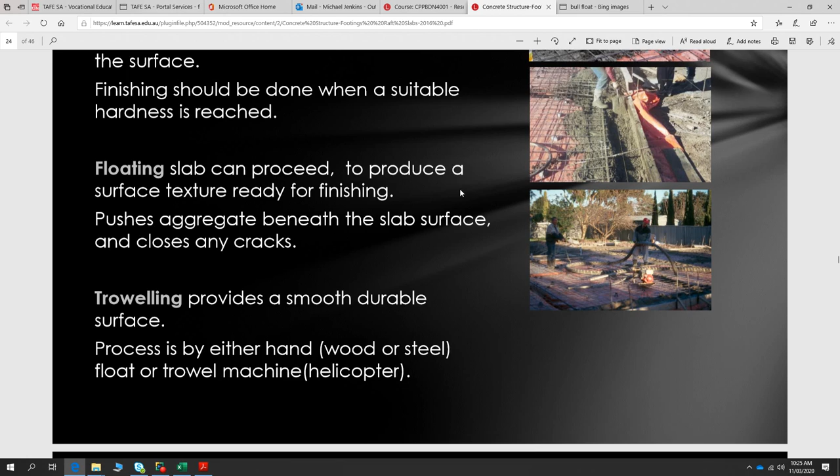If we're doing paving or something, we might put an even rougher surface on top of that concrete by using a broom - a stiff bristle broom - and run that across the top to roughen up the surface.

This shows where the wet areas are being set down. You pour the concrete into the footing beams, and then you pour the wet area. Once that wet area level is all correct, you set out your timber work, and then pour around that. One really good detail, if you can achieve it on site, is to actually make up a timber frame the right size for that wet area before the concreting happens.

That's all braced nicely, so you don't have to use these steel pins. The reason you don't want to use those steel pins is because they hold those boards in place while you're pouring the rest of it, but then they get pulled out and you fill that bit with concrete. Quite often you get differential cracking in that little bit there, which is an entry place for termites. That's very common practice, but it's not the best practice.

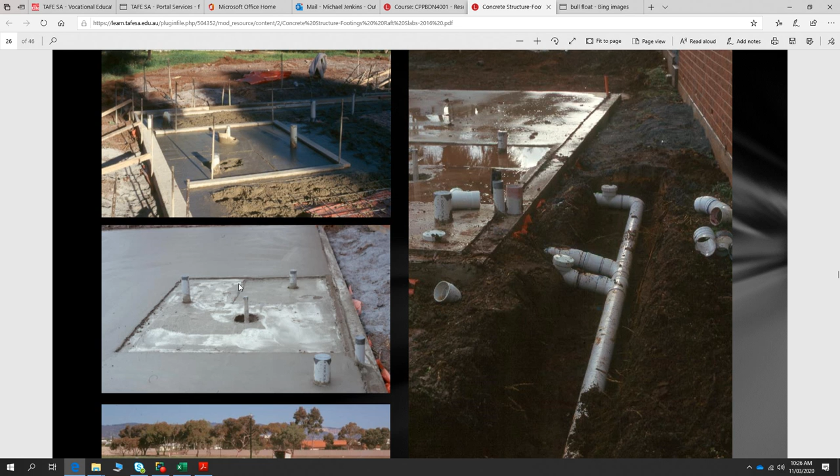Best practice is to actually have a box made up for your set downs. So the set down gets created first, and those timbers will be 50 millimeters high, and then you'll pour the rest of your concrete up to the height of those boards - that'll be the rest of your floor. So that's the finished product there, where you've got the top of your slab and your set down, and then a further set down for the shower. This set down might be 30 millimeters, and that might be 50 millimeters, or we might set the whole thing down by 50 millimeters.

Another thing you can do with your slab is use a piece of styrofoam to go around your floor trap. That enables you to put in what's called a puddle flange, which is a deep flange to go around your pipework.

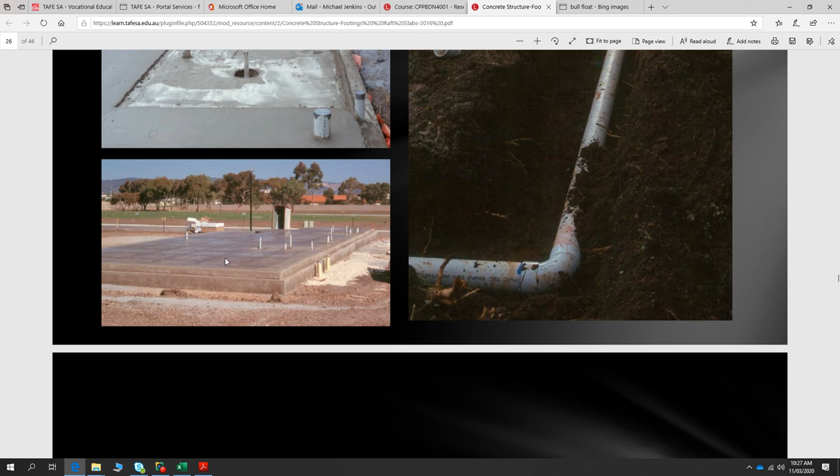That to me looks like a waffle pod slab. We spoke about waffle pod slabs earlier, how you create a level site and set out your styrofoam boxes, then pour your concrete over the top. We can see there's lots of little squares happening in the top of that, which is also indicative of a waffle pod slab.

Once the concrete is placed, you have to take very good care of it. One of the most important things you can do is enable that concrete to cure. As soon as concrete gets mixed, you want to slow down the process of it drying out and going off.

An important consideration for where you get or who you buy your concrete from is how far away they are. You want your concrete batching to be as close to your site as possible, because it gives your concreters the most time to be working with that concrete in producing the slab.

But once it's all placed, troweled and finished, you want to slow that moisture loss as much as possible. So several ways of doing that. One is to spray on a curing compound - this blue stuff that gets sprayed on top, which stops the moisture coming out of your slab, keeps that moisture inside, and slows down that reaction.

Another way is to cover it with plastic, or you can dam it up and cover it with water, or spray it with water. Basically what you want to do is really slow down the moisture loss from that concrete. If concrete goes off really quickly and dries really quickly, it's much weaker because the bonds between the molecules are not as thorough. So you want to slow down that moisture loss.

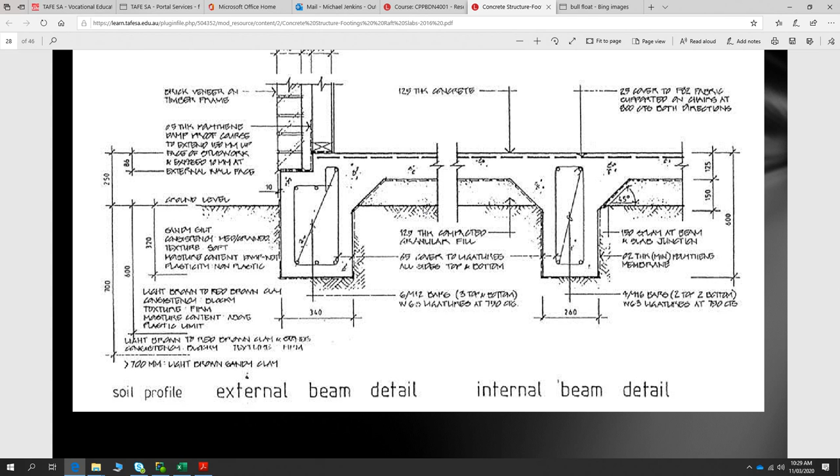This shows the cross section through a raft slab. So what we've got here is ground level - that's the soil that we benched to. We took off 150 millimeters of soil, got down to this, then added 125 mil of compactable rubble and beveled those edges at a nice 45. Then we put down our plastic, put our steelwork in place in the cages, put up formwork, and poured the concrete on top.

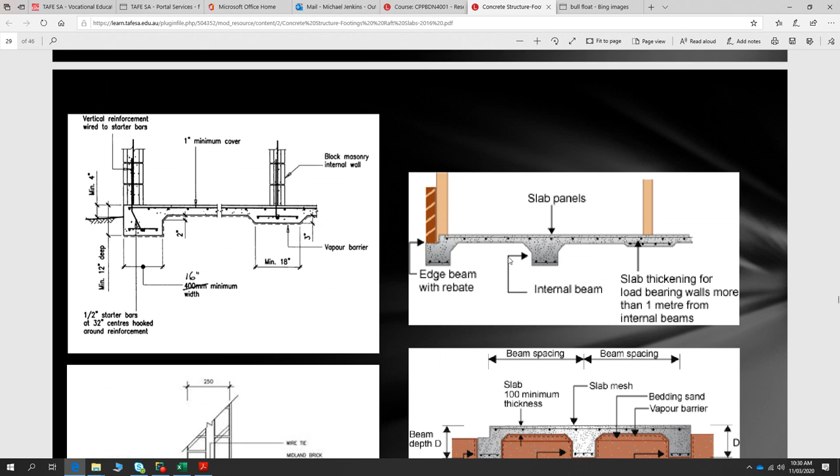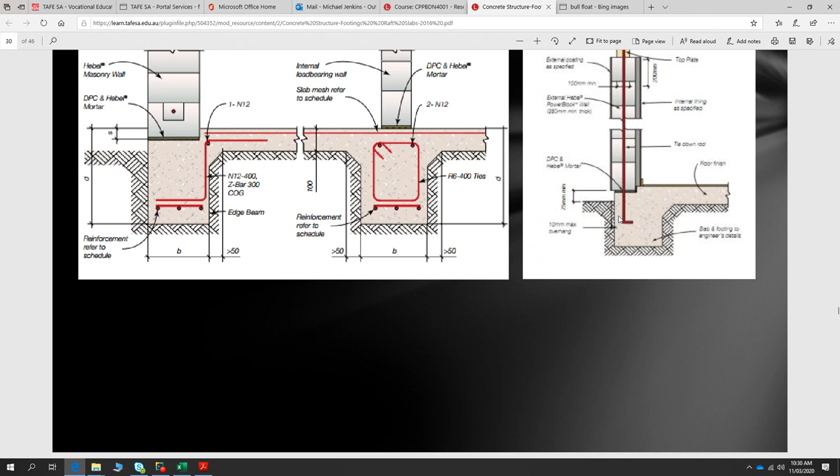There are a host of other details in terms of slabs and so on that you may look at. These ones use separate bars. There's also stuff called trench mesh, which does the same job as bars, and in some situations you can supplement bars with trench mesh. Also, if we're going to be doing a core-filled concrete block wall, we'll typically concrete steelwork into that slab with a cog on the end to help tie the wall.

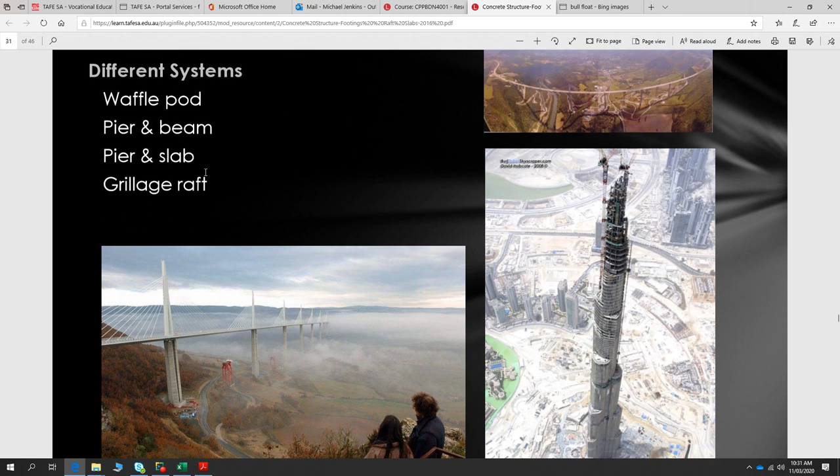I'll go through these sections a little bit quicker. What we've just seen is the mainstay of concrete slab construction in South Australia, but there are many other different types of footing systems to cater for many different situations. So one is the waffle pod, pier and beam, pier and slab, and that grillage raft that I spoke about.

Then you set out these styrofoam boxes, and they've got little spaces that go in there that also hold the steel bars in place, making it really simple for people to do. Then you set your edge boards around that and pour the concrete in.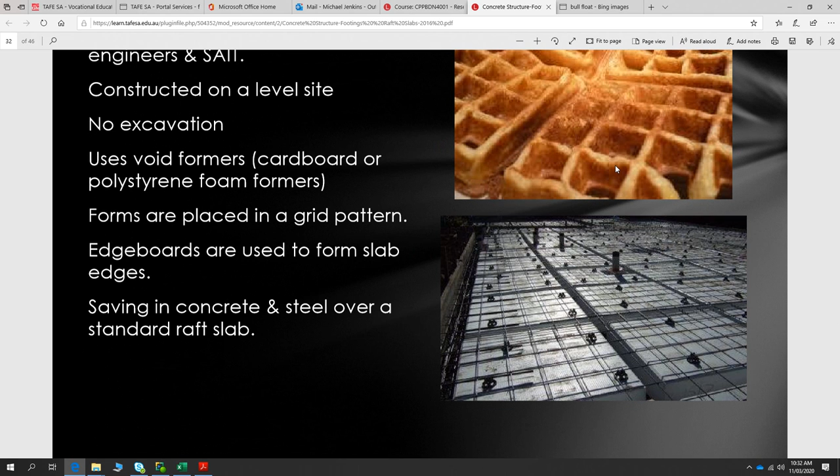You'll still need to have that engineered, of course. You're not going to design your own waffle pod slab, but you'll specify to your engineer that what we're wanting to do is a waffle pod slab, and then they'll specify what actual pods you need. If you're going to be doing wet areas or so, you obviously need those pods to be set down.

One of the major benefits of that is that it has significant savings in concrete and steel. The way that works, you need less concrete and steel for your surface area for your slab.

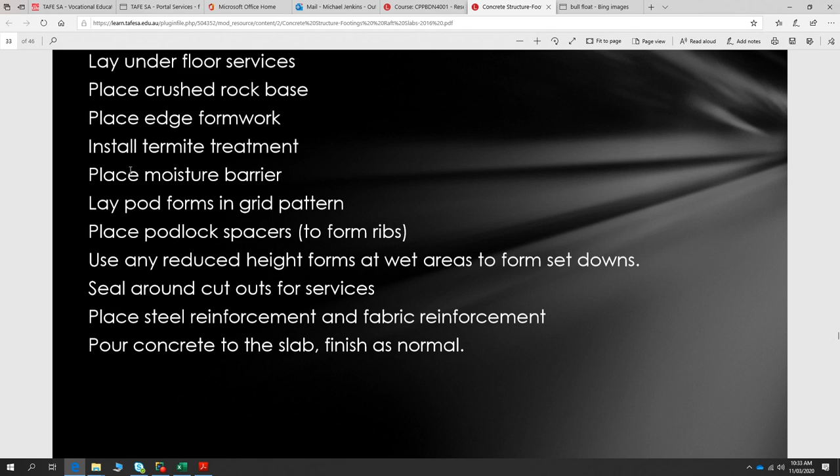So the process for that is removing the topsoil, laying all of your first fix plumbing, installing termite treatment, placing a moisture barrier on the ground, and then laying out your styrofoam boxes. So that's how they come, just stacks of styrofoam boxes. You set them out with the right spacing, put bar chairs on top, and then lay slab mesh on top of that.

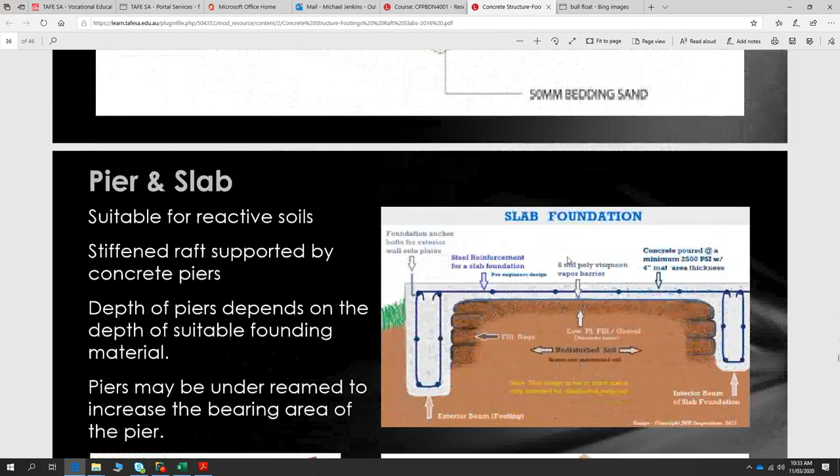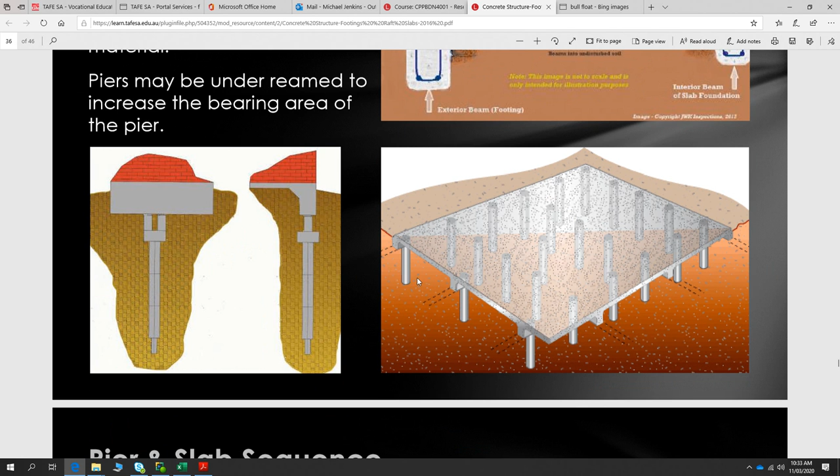And then of course, after that, there's the placing of the concrete on top. As I mentioned before, we've got areas around Adelaide with really junky soil or things dumped in the ground that mean we can't simply do a slab on top. When we encounter situations like that, we've got to do a pier and slab, where you auger out your piers to lock into stable soil down underneath, and then pour the slab on top.

So once again, you clear the site, mark out the positions of everything, and bore the holes. Sometimes you'll need to place circular forms around the holes if you're picking those piers up, so something like a former tube goes in there.

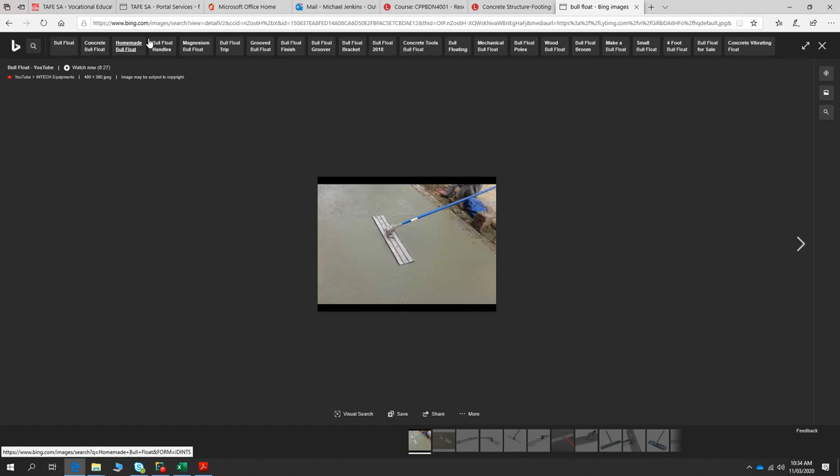Then, do I have any pictures of reinforcing cages? No. I'll quickly grab a picture of a pier reinforcing cage as well. It's the sort of thing I'm fairly sure once you see it, you'll say, oh yes, I've seen those before.

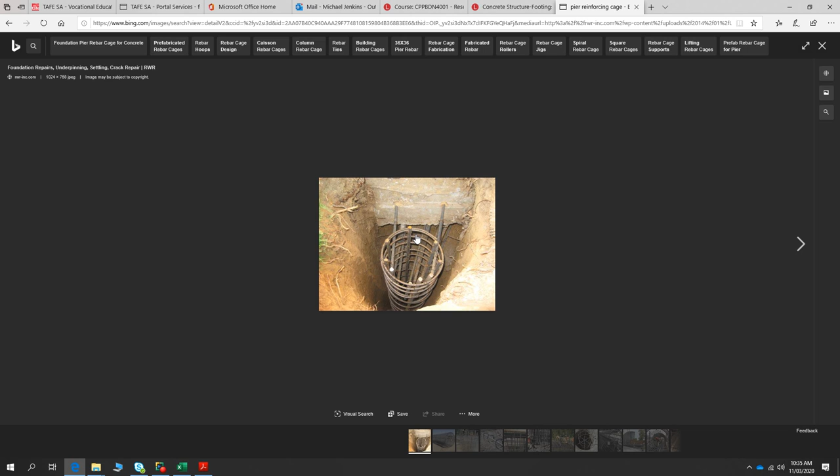So that's typically a pier going down into the ground. Those cages are made up above the ground and then lowered in. Fairly simple to make - you just bend all your 10mm bar in a circle, lay your stronger bars in there, and tie them at the right interval, and that cage goes in. Then the concrete goes around that. As with any concrete in the ground, you want to ensure there's adequate concrete coverage. You don't want that cage laying against the dirt on one side, because if it does, it'll rust, explode the concrete away, and that pier won't last for long.

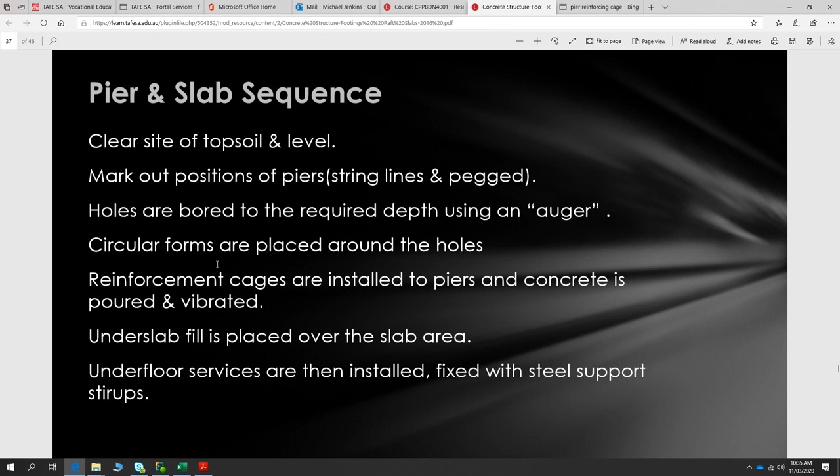So you bore out the holes, make your reinforcing cages, and then pump the concrete into the pier, vibrating it as you do so. Once those are all set and gone off, you lay your underfloor plumbing and then pour your slab on top of those piers, finishing your slab as you would with any other slab.

Pier and beam is basically the same - that can be timber beams or concrete beams. That's typically for when you do piers that go out above the ground, and then you do beams across those piers, and then do the slab across that.

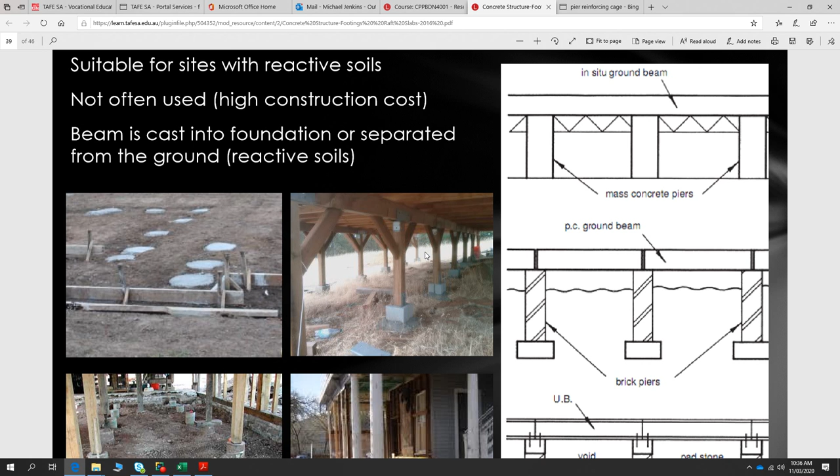So not all concrete slabs are on the ground. Sometimes you'll have concrete slabs set up above the ground as well. When we get into project 2, we'll be looking at those types of systems, like what we have here, where we have concrete slabs actually elevated for creating floors.

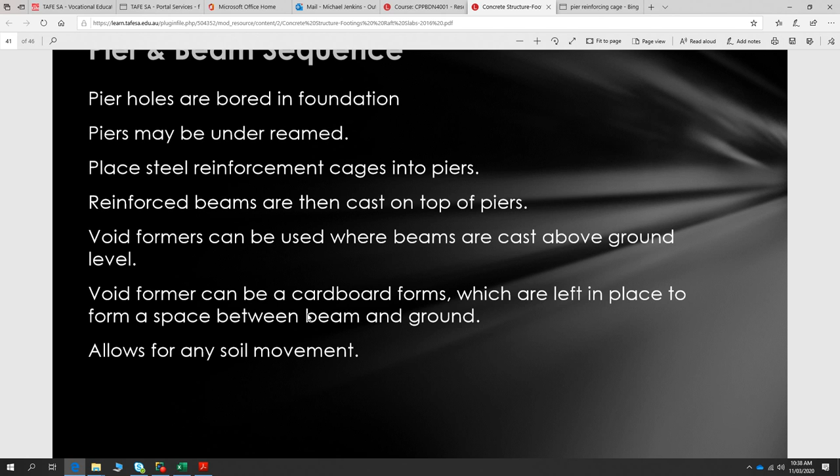If you're doing something like that, a really easy way of allowing that to happen is by getting some of that orange plastic, the same plastic you use underneath the slab, and making cylinders of that, sleeves, and dropping that down in your piers before you pour the concrete in, because it gives really smooth sides to your piers. That enables your pier to lock into the soil right at the base, but that soil can move up and down past it without influencing the side of your pier or your building.

So I mentioned the grillage raft before. The difference between your normal raft slab and a grillage raft is that rather than having 3 bars top, 3 bars bottom, and ligatures holding it all together in a cage, you just have 1 bar at the top and 1 bar at the bottom with hangers in between. So much simpler to fix, and it's a really quick process, which is why volume builders like them. Because if you're just putting carpet over the top, it doesn't matter if you've got a little bit of cracking or movement. So there's definitely cost and time savings by doing grillage rafts like this.

Question: can that be used for both 1 and 2 story buildings? Yes, it can be used for both. Typically the big difference between a 1 or 2 story building is weight, so any raft slab has to be designed to carry the weight of the building. For example, a single story solid masonry house may actually be heavier than a 2-story frame and cladding house. If we do a timber frame with weatherboard cladding and it's 2-story, that might still be lightweight construction compared to a cavity brick house. So your footings are designed based on the weight they're going to carry. You can use a grillage raft for single or double story for whatever weight you want, dictated by the depth of the beams and the size of the bars that go in there.

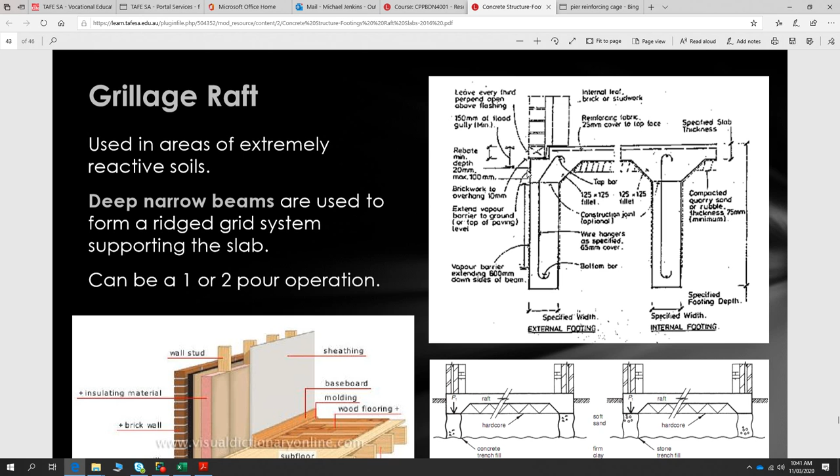Then with your strip footings, typically we don't use these in Adelaide because our soil is too reactive for it. But in scenarios where we've got fairly stable soil and don't want to spend a lot of money on footings, and we're using a timber floor, for example, then a strip footing might be a good alternative.

Quite often also with strip footings, if it's going to be external walls, etc., you'll do it with concrete blocks associated. One really handy thing with concrete blocks is you can core fill them, meaning you fill the cores, the holes in the centre, with concrete. And if you carry reinforcing, set it in that strip footing and carry it up, then feed your concrete blocks on top of that reinforcing and mortar them in place, and fill those with concrete, that binds the concrete block wall to your footing, which gives it a lot of strength.

I did that for a retaining wall underneath a garage to hold a suspended slab. So that's a fairly common example of where you'd do a strip footing like that, with concrete blocks on top, then bear a slab on top. It actually gives a lot of strength because you can carry that reinforcing and bend it over into your slab as well, locking the whole thing together.

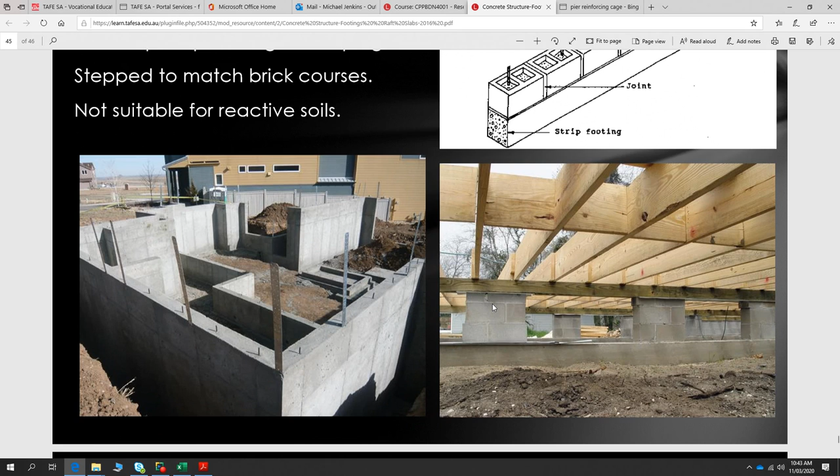So there's an instance of a strip footing with concrete blocks on top, possibly core filled. And there's an instance of a strip footing with your reinforcing sticking up.

One thing you definitely have to do on site is cap all of your starter bars. Uncapped starter bars can actually be very dangerous, if you read the Safe Work SA on-site incident reports that come through. You could fall on them—like a 10 mil rod—if you fall on it. So you put little plastic caps on top. Make sure they go on and go around.

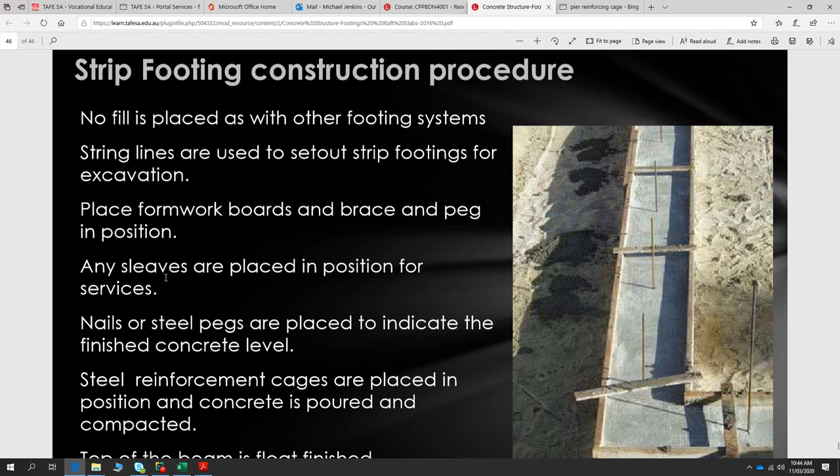So once again, use string lines to set out for your footings, place the formwork, and then finish your concrete to the right level. Nails or steel pegs are placed to indicate the finished concrete level. Typically, laser levels are ubiquitous these days, and concreters who use laser levels go around to get accurate measurements as they're setting out the concrete.

And that's pretty much it for our concrete footing. So I'll stop that recording.